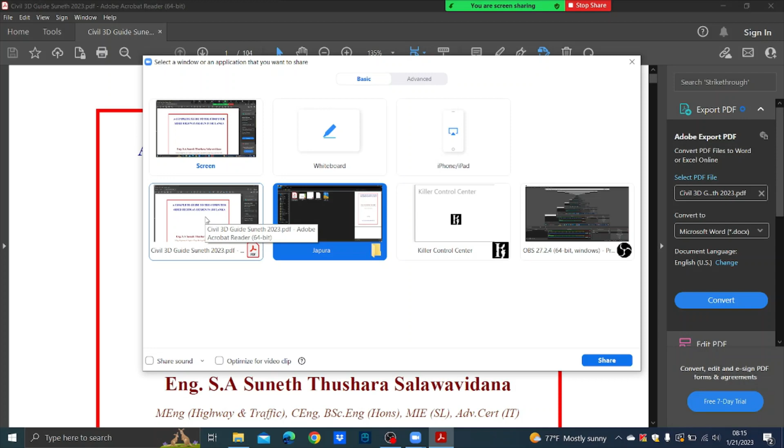Now of course this is the booklet I described, right? Here everything is there, from introduction to how to do the surface creation, that is 3D modeling.

Theory parts are also there, and how you are going to do the horizontal alignment, how you design compound curves, reverse curves, transition curves, and how to enter super elevation.

And vertical alignment. Now please understand, when it comes to vertical alignment, there is something called the offset method. At the very beginning, the data set we are having is using total station. So the problem with the total station is their levels are not that accurate.

But please understand, accuracy is different in highway engineering. When it comes to structural engineering, accuracy may be 1 or 2 millimeters. But when it comes to roads, we don't have that much accuracy. Maybe 5 millimeters or 10 millimeters is enough.

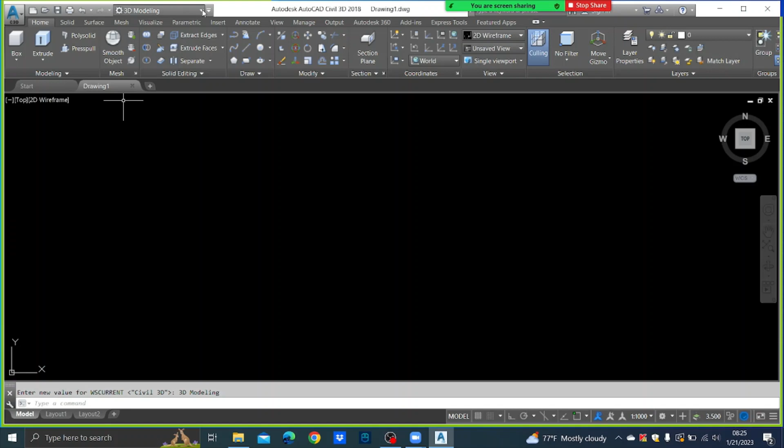If I drop down it, there are some other things as well. Now just think that if I go to 3D modeling, the working environment is going to change, right? If I am having Civil 3D, again it's going to change. And then right hand side of this workspace, you have another drop down box where you can either tick or untick this show menu bar. Now just think, if I untick show menu bar, what will happen?

I'll hide the menu bar. Here that file and things are not there. Now if I go and click show menu bar, here file, edit, view and everything is there. Now the command line should be there. Otherwise, as I remember, it is control F8 or something, the command will come. Now let's check control F8. No, control F7. No, F6. F6 gone. Anyway, don't worry, you can again start, right?

Right. Then the first thing that you have to do is you have to have your own template. What do you mean by a template? Now, please understand, usually any road agency or any highway design company has their own format. Some people call it chainage, some people call it station. Some people give the chainage as 0 plus 000. Some people give just 0, right? Different road agencies give different; it is kind of a presentation technique.

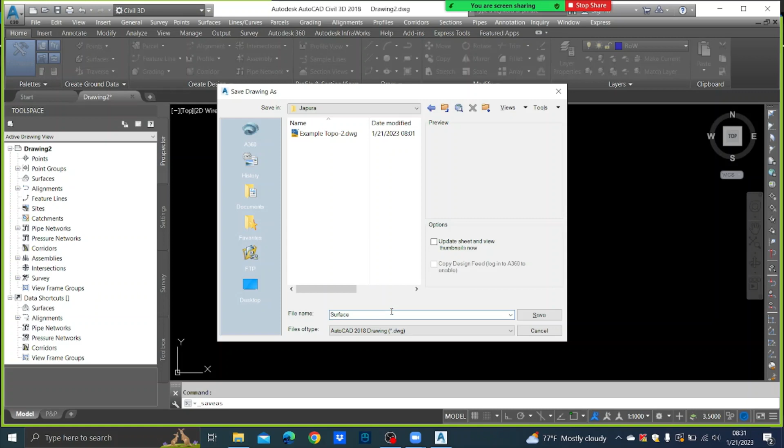Now please understand, I am not going to follow that book or that presentation. Everything is there. You can later read. But what I am trying to do is I am doing what is necessary, and that is there in my presentation and in the book. So actually I'm going to record this one and I'm going to upload. So if you have any problem, of course, you can later refer. So don't worry. If you have the software, please try to do what I am doing. Okay, that's all. If you are going to miss something, don't worry, we'll correct them, right?

So now your surface is being created. Surface in the surface file is created, right? So I will open my topographic survey file to see what is there. File, open. So here example topo 2, I'll open it. Now you know what is that, right? This is a topographic survey of a road. So what you can see there. Now there is a bridge here.

What is this yellow line? This is the towage line. That means the existing towage, right? What is this yellow line? That is the existing towage RHS side. Then what is this red color one? That is the existing center line.

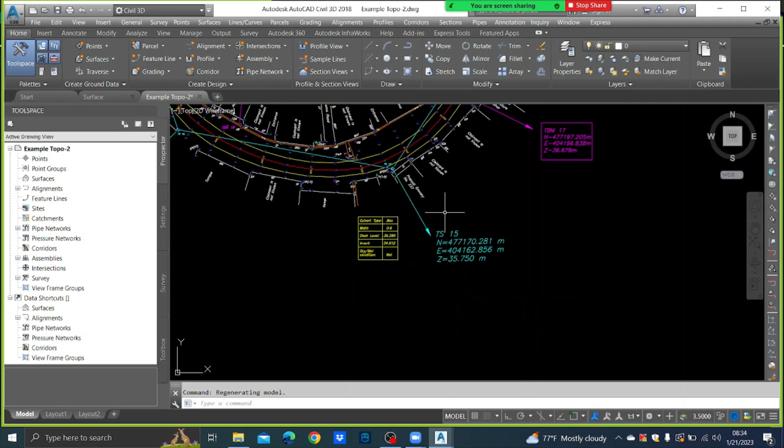So here there is this Samavata, and then Nilhani Motors, Nilhani stores. Like that, everything is given. So what are these things? These are the total station points that they have used, right? So they have run a topographic survey, and these are the points that they have taken. We want these points, so maybe these are some permanent stations or something. We want these points to set out our road once we complete the design. Okay. Now there is another thing they have given. I'll show you.

Here I open that notepad file. Right here, these are just data. These are just data. Okay. Now can you see here that survey has given us the data format PNEZCD data. What do you mean by P? P is point number. So please note down, right?

P is point number, N is northing, so that is the northing coordinate. E is easting, so this is the easting coordinate, and PNE, this is northing, this is easting, Z is elevation, 49.272, and CD, I don't know what do you mean by C, but it should be D only, right? D is description, NB like that. So that's all what we have got. We have got the file, topographic survey file, and we have the data set. That's all we are having for the time being, right?

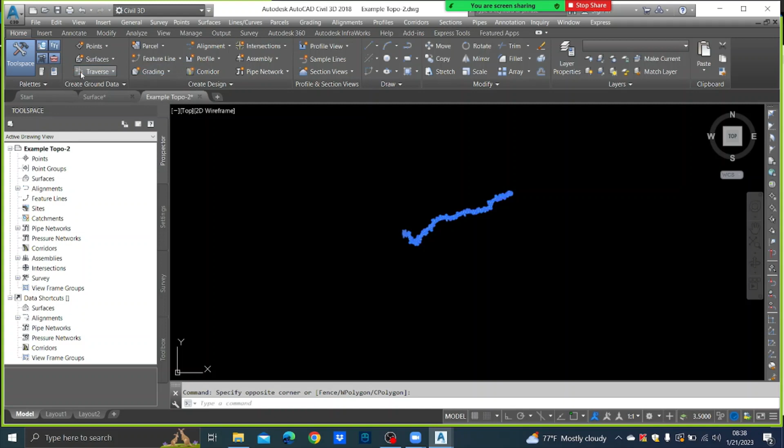Now there are two files. Can you see? One is surface, other one is example topo 2. Surface is the file that we created using our template. Example topo 2 is the one that survey gave us, right? So I'm going to copy this. When you select them, please understand you have to select both to select everything, right? Top to down, down to top. Edit. How you are going to copy? It should be just copy, right? So the cursor came back.

Then we will shift into surface, and here why is there? Because I have gone to a layout. So you go back to model, right? Then edit. Remember, don't just paste to original coordinates. There is a difference between your structural drawings and highway design drawings. If it is structural drawing, you don't have a coordinate. Okay, so you can paste it anywhere you want. But when it comes to the highway drawings, we always work with a coordinate system. Either it can be national coordinate system or global coordinate system or a local coordinate system or whatever, right?

So usually we go to paste original coordinates. So that means the drawing comes to the original coordinates which was done in survey's drawing. Okay. Paste to original coordinates. Now here this is that one. If you don't see it, okay, just think it's somewhere there. You can always try Z enter, E enter, that is zoom to extents, right? Now this is our survey drawing copied to our template, right? So you can save the drawing.

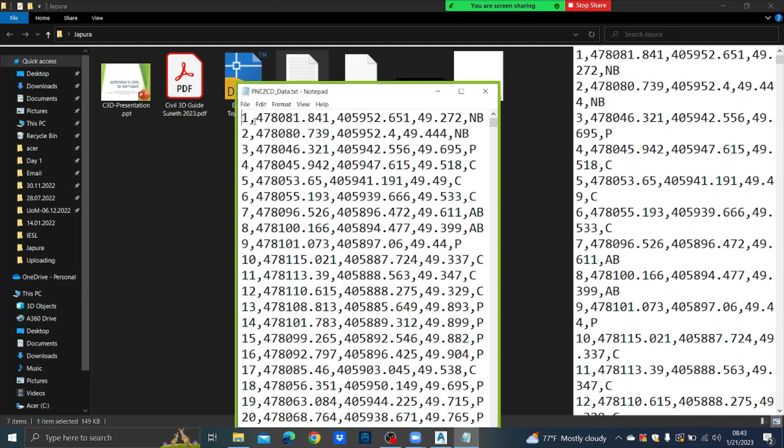Now do you remember here in our text file, it is separated by commas, not space. One comma, there is northern coordinates, comma, eastern coordinates, comma, and the elevation, comma, something like that. Okay, so that means it is comma delimited, not space delimited. If it was space delimited, there should be only a space, not a comma. So you have to select comma delimited format, right?

So here you have to select PNEZ comma delimited. PNEZ comma delimited, right? Here selected files. So it takes some time to show, isn't it? So you have to select here PNEZ comma delimited. And here from this plus mark you have to browse into your file. Now please pay your attention carefully for these things that I am telling. Now this is one such thing.

You have to make sure that your notepad file is closed once you do this. Why? Otherwise there will be a sharing violation. Why? You can't use the same file in two programs, one in notepad, other in Civil 3D. Okay, so what you have to do is you have to close the notepad if you have opened it to check something, right? Now the notepad file is closed, right?

So now we'll add and we'll go to our folder. There's nothing, right? Why? If you check files of type, it is CSV. That's a different type. Okay, so you can have dot text. Then it shows PNEZCD data text. Select it and open it.

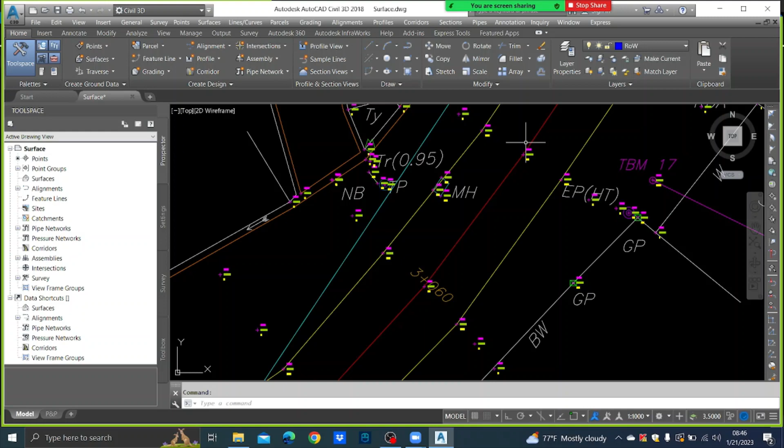Okay, can you see? And again, I invite you to observe some very crucial things in this file. What are they? One thing is, this is our existing center line. Now you can see the data has been taken exactly on the existing center line. Actually, what has happened is not that they have taken the data on the exact existing center line. What they have done is they have taken the points and then they have drawn the existing center line connecting each of them. It's same for tar edges, LHS and RHS.

Okay, now this is finished. We have imported all the points into our file, right? Now, before proceeding, do you have any questions?

Now, please understand that you are having a very big privilege to study this software, right? So, get the maximum use of it. We have only 4 hours. Please ask me questions if you have any. Right, no questions as usual. Right, so then we'll proceed.

Now I am going to create the surface. What do you mean by a surface? Surface means I am going to 3D model this road. Now you know this road is in 2D, because whatever you draw in Civil 3D or AutoCAD is in 2D, right? Okay, unless you have gone for some 3D design. So I mean the 3D modeling. Now we are going to 3D model. Up to that it is 2D, right? So what I'm going to do is I'm going to create the surface. So once I create the surface, I'll describe what do you mean by a surface, right?

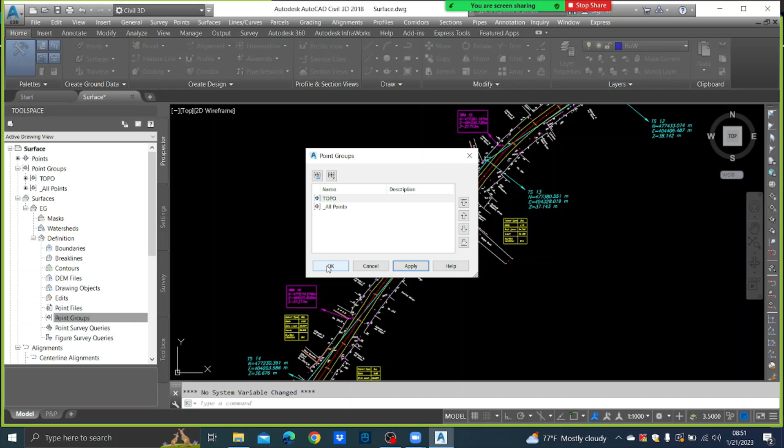Now you can close this. Here this is our surface. Now please pay attention on our surface. Now look what they have done, right? Look what they have done.

These are the points that we imported, and what they have done is they have drawn lines connecting each other. Now here our level is 36.892 and here the level is 36.819. Remember the levels, right?

Now if I check somewhere in between, you will see you are getting some elevation value at the very bottom, right? Elevation 36.825. So what this software is doing is that it interpolates the levels in between. So higher the number of levels that you have taken, higher the accuracy is going to be.

Understood? But usually we don't take levels everywhere. We are taking important points, right? Like edge, and then the center line. But remember now I'm going to tell you one important concept. I will save this first.

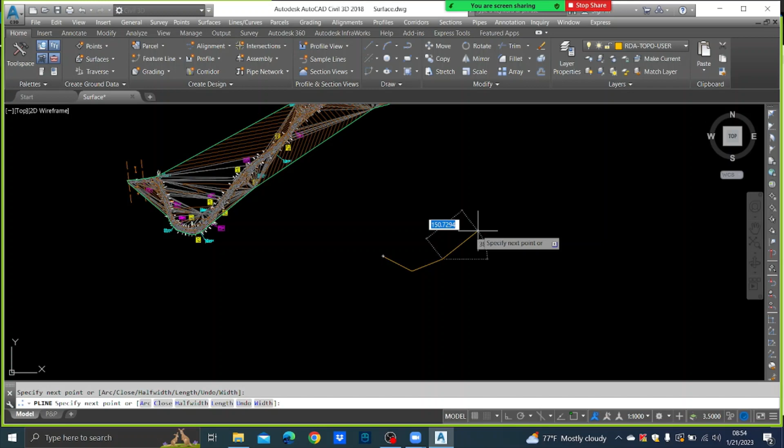Just think this is our road. And I am selecting some random layers. Why? Because I'm going to explain you something, right? This is the tie LHS, and this is the center line. This is the tie RHS. Okay, this is your road cross section.

This is LHS tie, center existing center line. This is what? This is tie RHS, right?

Now, you know, surveyor has taken these points in our cross section. Just think this one, and this one, and this one, and this one, and he has forgotten to take this center line. And he has taken, sorry, and he has forgotten to take this point also. He has taken this point, right? And he has taken this point also. Now I ask the Civil 3D to draw this cross section like this.

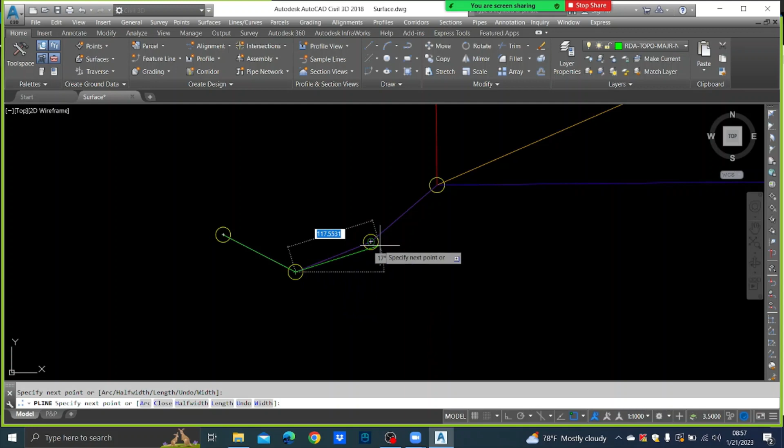Then it will try to draw it like this. I'm coming here, there's a point. I'm coming here, there's a point. I'm coming here, there's a point.

Then I am trying to go there, but there is an instruction. Definitely you have to connect this point. There I am coming here, and here what happens? There is no such instruction to take this point, so it will go like this. So now if you just think, this yellow color one is the actual cross section.

Blue color one is the cross section that the Civil 3D has now drawn, because we haven't given that other instruction so far, right? So this is the one that the Civil 3D has drawn so far. Now we are going to give an instruction.

Definitely you have to connect these 3 points. So once that instruction is given, this is the cross section it's going to draw. This is how it is going to model, right? Is this the most accurate one? No. Why? Because this is not connected.

But still, as far as our road is concerned, it is fairly okay. Now we are worried about our road mostly, not the widening sections. So this is exactly what I am going to do. I am going to give an instruction to the software saying definitely you have to connect this point, and this point. So for that, there is a tool in Civil 3D calling what? Break lines, right? So I'm going to delete this cross section drawing.

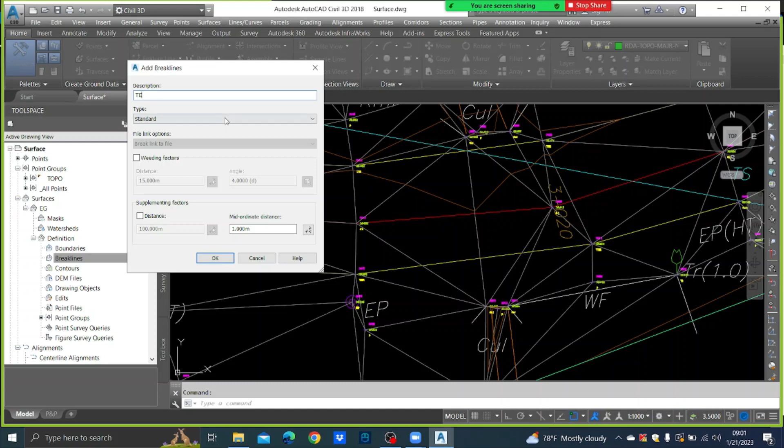You go to general tool space. If it is already there, don't do anything. So there is this expansion here, and you go to break lines, then right click, add, and give the description as TE, type should be standard, and then press OK, and then it says select objects.

So you select this edge and you select this edge. Now pay attention, once I press enter, these lines that cut edges will vanish. Press enter, right? Now it is no more.

Now I have to give another break line, that is the existing center line. Here you can see this is the existing center line, they have cut it. Now I am going to add this center line as a break line, and these two lines will be gone. Break line, right click, add, give the CL, type is standard, and press OK, and select objects, this red line, that is center line. Press enter. Can you see now it's gone?

Save the drawing. Right. Now there is an obvious error in this surface. What is that? Now I told you how the Civil 3D models the terrain, by drawing lines connecting each of the points. But now just think here, there is one line starting from here and it is coming there. He has taken some there. Now everywhere in between, the software is trying to interpolate the levels. Is that correct? That's wrong, obviously.

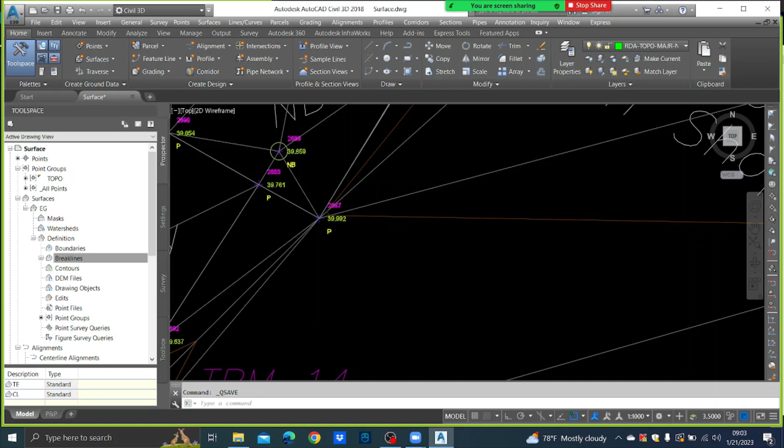Now if you just think here, there's one point here at this part of the road, and there's another point there at the other part of the road, and they have connected these two, and they are interpolating in between, because we know nothing about this area. We haven't taken level, so this is obviously wrong. Now here also see one point here, another point there, and they are interpolating. So we have to show our limits. This is all you have to go, right?

So what we usually do is we add a boundary for that. So before drawing the boundary, make sure that your O snap is off, F3, right? Then this is a polyline. So you draw a polyline. It's like this. So select your boundary. This should be our boundary.

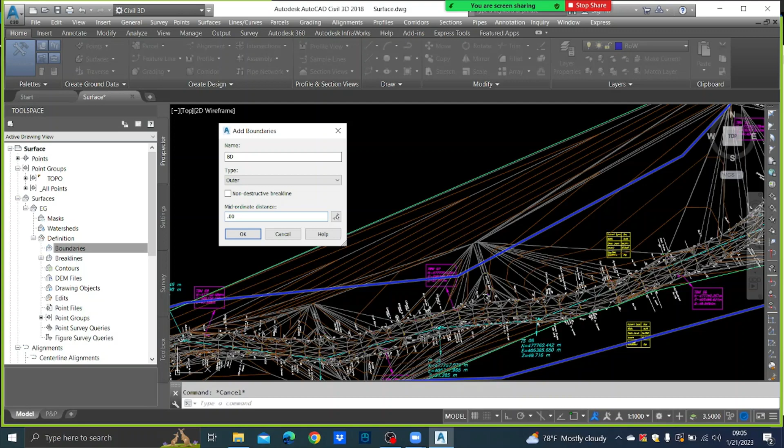There is something called boundaries. You select it, right click it, add, and press and type BD. Type is outer, untick non-destructive break lines, and mid ordinate distance you have to give as 0.001. These are some conventions. Press OK, and then they say select objects.

Once you select this object, you will see the lines beyond that one will be gone. I'll select this one and press right, already gone. Now this is our surface. This surface is perfect, at least up to the accuracy given by the Civil 3D software. Right, save the drawing.

There is another thing that we are going to do. We are going to export this into XML format. XML is a text format. This is kind of a Civil 3D format, and we are going to export this into a text format.

The advantage is, you created this surface in Sri Lanka, maybe you can export and email that into America or Australia without any problem, because you are going to reduce the capacity of the file. So have you studied some IT?

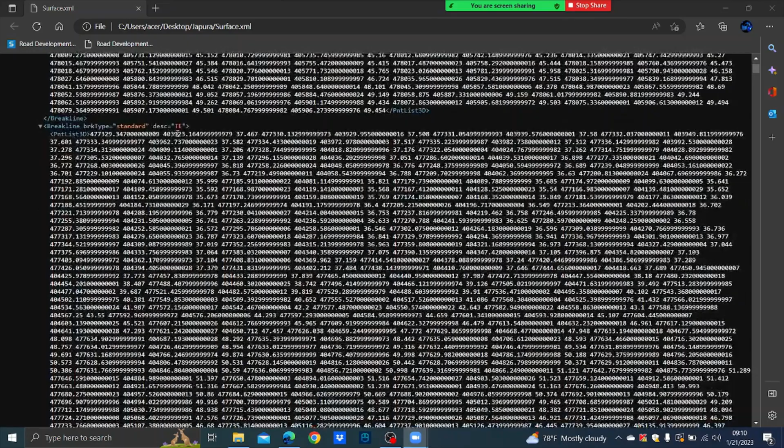Now you can see they have defined the boundary. These are the coordinates, and they have defined the break lines. There should be three or two because we created two - this is TE, yeah, there's another one TE, and this is CL. So they have defined the break lines also, and after that these are points - they have defined the points also. So everything is there. Now you can see the sheer number of points. Everything is there, only thing is that you can interpret it.

Now again open Civil 3D software. Right, I have opened Civil 3D software. Now I am going to load my template. Do I have to copy and paste it again? No, because the template is already there.

Here file, new, and here a folder is there. This is our file, you open it, press close, continue with the current command, and then you can save it as - go to your folder and you can save it as, say, alignment. Now this drawing one is the one with the default template, you can switch off it.

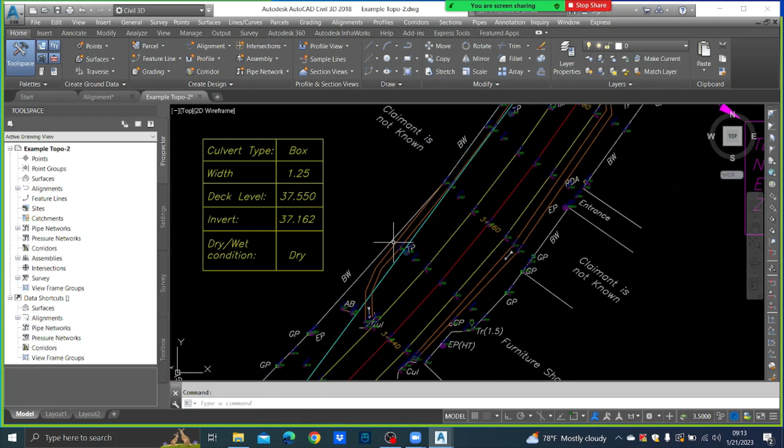Now you know again you have to do these corrections, what you did. You have to switch off these things or freeze, number also, and then height also, and this point we'll see point. Right, now select everything.

Edit, copy, copied, go to alignment, edit, paste to original coordinates. Here, now you close that example topo 2 and save this alignment. Now even though you call it alignment, nothing we have done. We have only copied the surface drawing from the surface drawing, right?

Now we can import our surface that we created. How we are going to do that? File, import, import land XML. Now you go and select surface and press open. Here also press OK. Now you can see your surface is imported.

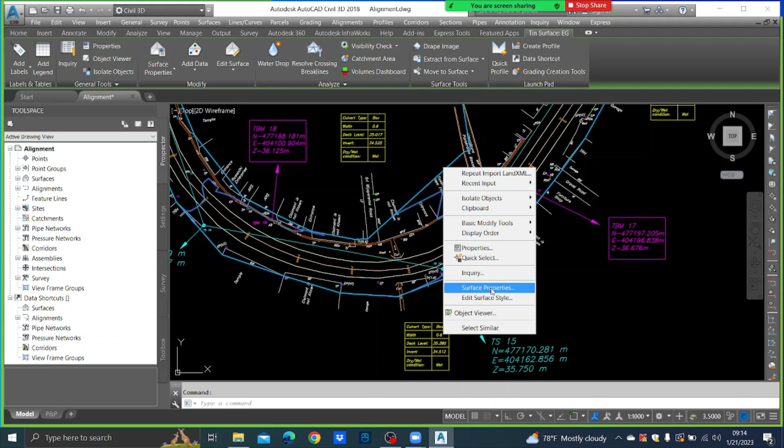If you have any doubt whether this is the same surface, what you can do is you select this surface, go to surface properties, and here surface style should be, you remember, contour points and triangles and borders. Press apply and press OK. Now this is the same surface that we created. Save the drawing.

Now you know when we are going to do the alignment, of course we don't want to see these details. So what we are going to do is we are going to switch off the surface. Now you will ask me why, if you are going to switch off it, why did you create it at the first place? That I will explain you in the middle, right? Why we created this, right?

Now you select this one, right click. Don't delete, right? If you delete, it's gone. Okay, so what you are going to do is you go to surface properties and then surface style we are going to put it to no display, right? Then still there are some three lines. We'll see what are they. This line is EG break lines. So you can switch off it, right?

Now this is our road and we are going to put the alignment, right? Now before trying to design the alignment, before trying to design the alignment, you have to do something. What is that? You should know the theory behind it, right? What is that theory? Give me a second, I'll show you.

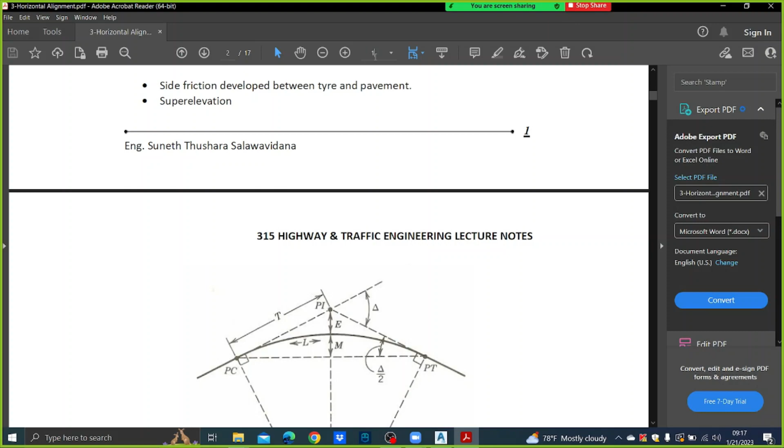I'm going to show you some notes, right? That you already have. This one you have like presentation, of course. So I'm going to show you a table. That table you have, right? Here, this is the table I want.

You know, so what is your design speed? You have to know that, right? Your design speed is 50, let's say. Then you know your minimum curve, your super elevation maximum. Just think that this is in flat terrain, so the maximum super elevation you can give is 4%, right? So your curve radius should be 95. So it's better if you can go above 105. So that you have to keep in mind. Your minimum radius is 95, and it is better if you can go beyond 105.

Also, if you cannot design for 50, maybe you can go for 40. So your minimum curve radius should be 55, right? So you have to put all your effort to improve that into at least a 55-meter radius. 95 is better. We'll see. Okay.

Right, now please pay attention. I am going to design, right? I am going to design. Please pay attention. Now usually, you know this is an existing road, right? So we are going to improve that. So for that, what we really do is we have to follow the existing centerline as much as possible. Now you know there is a bridge, of course you can't do anything with that.

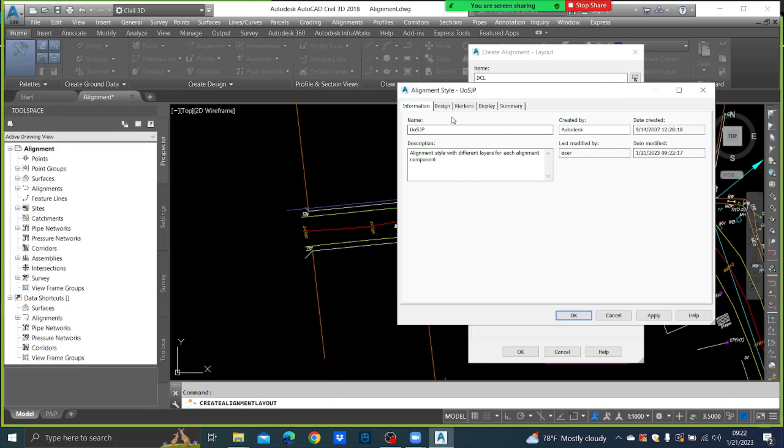Here these are, of course, just some templates. So if you want, you can change them, right? Say edit current selection. So if you want to change that name, you can change. It comes there, right? If you want to change these things, you can change here display. If you want to change a color or something, you can do it quickly. Okay, it doesn't matter, right? So you press OK,

and then there comes alignment layout tools. Okay, and then here we are going to design. Here you can see it should be a line, right? We are going to start our alignment either with a fixed line or a fixed curve depending on the road geometry. So here it should be a line, so we will select fixed line, 2 points.

Okay, so I'll select here, and I'll go this way. So you have to make it as close as possible to the existing center line, right? I entered, and now I press enter. Now you can see here it is being designed up to here. This green color one is the major stations, 0, 20, 40, right? And this blue color one is the minor stations, right?

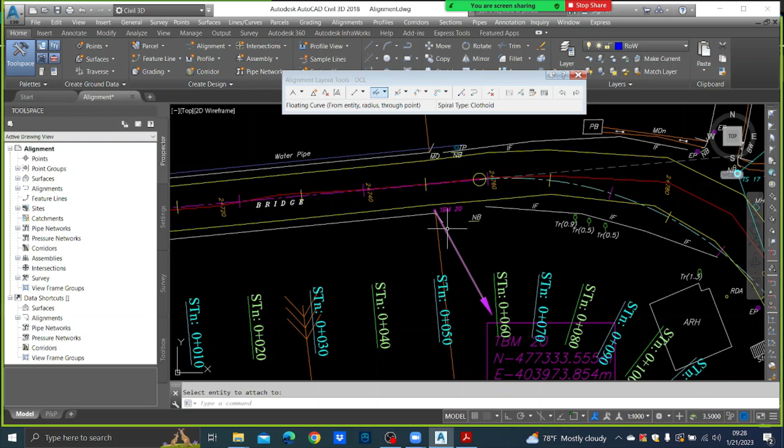But it improves the road. If your bridge is going to finish from here, then only you can have a curve like this. Okay, so your curve should not come into the bridge. These are the things that you have to check, right? Because you can design it and give, but they cannot construct it because the bridge is finished here. So only after that you can start your curve.

Now it's okay. Now just think, there it seems like a straight. So for that you are selecting floating line. Select entity to attach to this one. So I'm coming like this. You have to match it as much as possible to the existing center line, right? Now maybe if you want to change it a bit, you can change it like this, right?

And then what about this curve? There are two curves. Can you see? One curve is like this, the other curve is like this. There are two curves. It is not just one curve. If you want, you can check it. How? So you go to this home and here these are arcs. So you can get the start, end and direction.

This is not Civil 3D, yeah? This is AutoCAD. You select the start point, say this is the end point, try to fix a curve like this. It already fixed. You have to get this start and direction. You select one here, one point here, the other point somewhere here, and try to fix. You can't fix. Can you see? If I fixed it like this, this going to here, it is going to go out the existing center line.

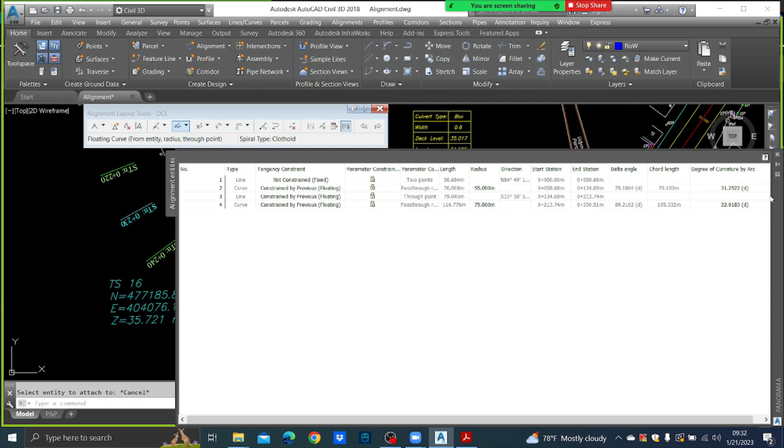If I put it like this, now you can see 75 is okay, but I am narrowing the curve. Can you see? If I go to this side only, I am improving the curve. Here I am narrowing. Okay, so one tactic that you can do is you can select this alignment, sorry, not that one, this one, sub entity editor, and then you can pick this sub entity and it shows your parameter. So you can increase the radius.

I'll go for 80 here, or maybe 85. 85 is too much, so I'll go for 80. Still this is a bit narrowing. So what about 82? 82 will be okay, but the problem is we usually don't go for this kind of odd numbers. It's better if we can go for 80 or 85, right? But if you can't help, then of course you can't do anything. Now I can't teach you anything about how to design. That you have to decide yourself.

Now maybe this is not going to work. We don't know, right? That depends on, you have to go to the field and check. Now before proceeding, I'll ask you a question. Usually you don't answer, so I'll answer it myself. But my question is, why did we create the surface here? Now, do you know anything about whether it is a precipice or a mountain or whatever?

No, you don't know. So one thing you can do is you can draw a line near perpendicular, need not be exact, to the center line, and then you can draw a profile and check what is the cross section here. You select this, right click, pick profile, and here change that into 1000, press OK and paste it here.

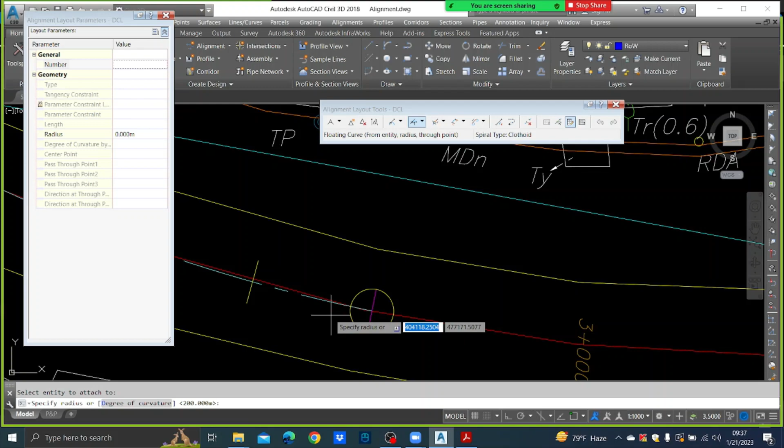Specify radius. So I'll go for, say, 150, lesser than 180. Then it asks, is the curve compound or reverse to the curve before? It should be compound. Why? The same direction. So I'll select compound. What is this red color one? That means you can't place it there because there's no such solution.

So my assumption is wrong. You can't go for 150. If I'm going to go for 150, I'll have to go like this. Escape. So maybe I'll try, say, 100. 100, this is less than 180 compound. Even 100 is not going to work. So what are we supposed to do? Maybe this may be a lesser curve. We'll check.

So our minimum one is 55, remember? So we'll go for a 60 curve, lesser than 180, compound. 60 is okay. Can you see? So my earlier assumption was wrong. It is a compound curve. This one is 80 and this one is 60. And now, you can't say perfectly, but it almost matches with the existing topography.

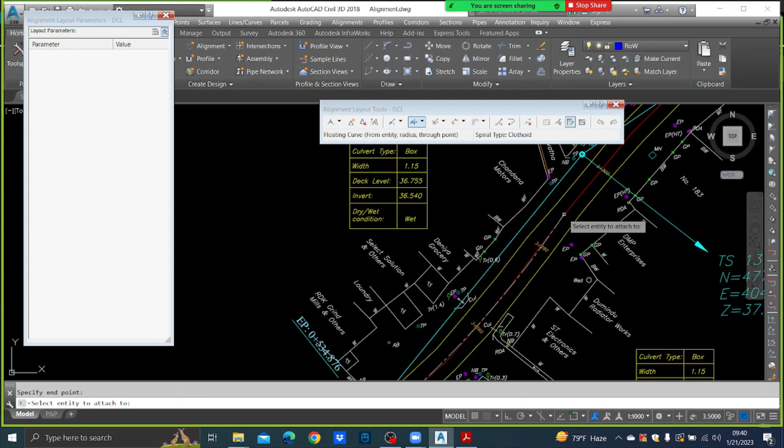Select entity to attach to. Then we'll select this one. Specify radius. I'll again go for 200, lesser than 180. Now here this is reverse. Okay, there is another curve. So that means it's again reverse, the other side. Again we'll take 200. Radius 200, lesser than 180, it is reverse. Seems it works.

Okay, now from time to time, save the drawing, because Civil 3D has a very good history of crashing. If it crashes, everything is gone.

Now there is a line, floating line. So I'll place it here, enter, and there is another curve. How much do you think? 200? We'll see. 200, less than 180. It is greater than 200. So you can improve it.

How much would it be? 300? No. Then we'll go for 250. 250 is okay. Then we have another curve. You have to assume. We'll say 200, reverse.

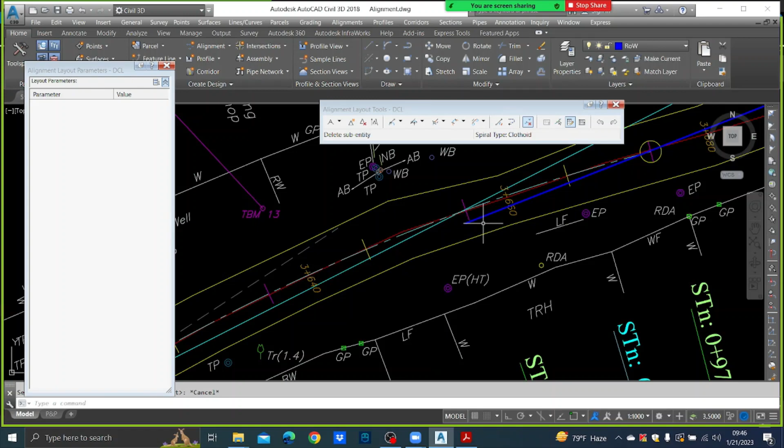Now these are the actual practices we do, right? Okay. Now this is the maximum you can go up to, right? Just think that is the maximum you can go. This line. Beyond that you can't go. So you get something like say 8 meters to the other side. Now this is the line that you have to follow, right? So what you can do is, your alignment is like this. You can go here and then you can have a line like this, right? Will it work?

We'll see. Now I am going this way, and now I'll go for 7.6. Now it seems okay. What about here? But they are going to be acquired. What if we are going to follow the existing center line? 7.6. These things you have to take decisions on, right? That cannot be offset because it's a polyline. Anyway, you can.

What is this one? My dimension toolbar was not there. That is why I put it here. So just check. No, we'll draw a line. Now this is the maximum place that you get towards their side, right? That's the maximum place that you get towards their side. Now offset 7.6. What happens? Now still their buildings are going to be acquired.

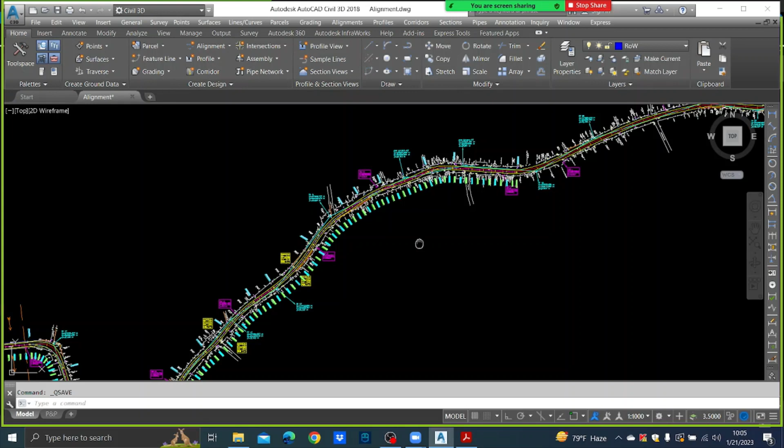Now this is our alignment. Next we are going to create our profile. So it's like a crash course. Quickly we finish align, create the surface, and then we create the alignment, and then we go to the profile. Before that, if you want, you can create your other alignments as well. So what are these? Now this is how you do that.

You have to have your lane edge, that is 3.5. So you can offset your alignment by 3.5. Here it's 3.5, the other side 3.5. So you can make them alignment also. It's not a big thing, you can quickly do that like this.

Alignments, create alignment from polyline. Earlier we selected create alignment by layout, right? Now we select create alignment from polyline. So they say select the first line, the polyline. We select here and press enter. Press enter to accept alignment direction. Now the direction, can you see? This is the direction, right? Otherwise you can reverse. Now this is okay, why? Because I selected it from the beginning, right? So I press enter.

Now I have to give a name. Usually I give DLHS, that is design lane LHS. The type should be offset and site is I design. Alignment style is this one and label style is UM. You have to remove these things, add curves, and keep erase existing entities, because then this line is erased and only the alignment is there. So press OK.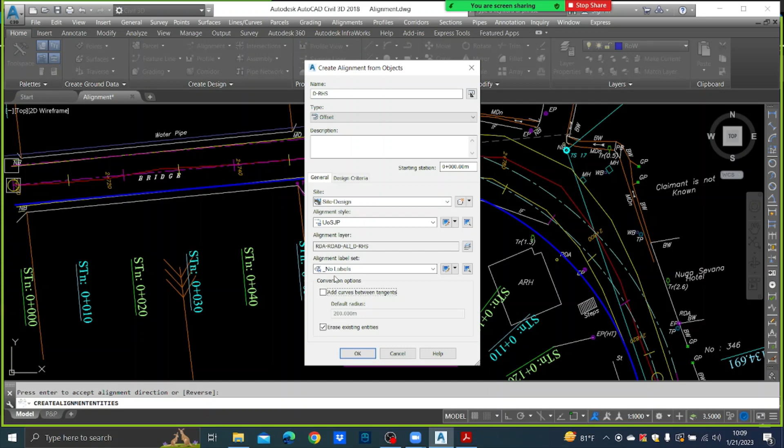And then we'll go to what? We'll go to hard shoulder, that is 1.5 offset. Object 1.5 offset, this side and this side. So I can make them also alignments.

Alignments, create alignment from polyline. Select this one, enter. No, I don't want to reverse, enter. You give the name like H hard shoulder LHS. Type is offset, site is site design, alignment style is this, but don't give alignment label set, so no labels is okay. Uncheck add curves between tangents, so erase existing entities should be there. Press OK.

Then we'll go to this one. Alignments, create alignment from polyline, and select this one, press enter. So this one H RHS, type is offset, site is site design, no label, same thing, right? Uncheck add curves between tangents, but check the erase existing. What I mean by check is ticking this.

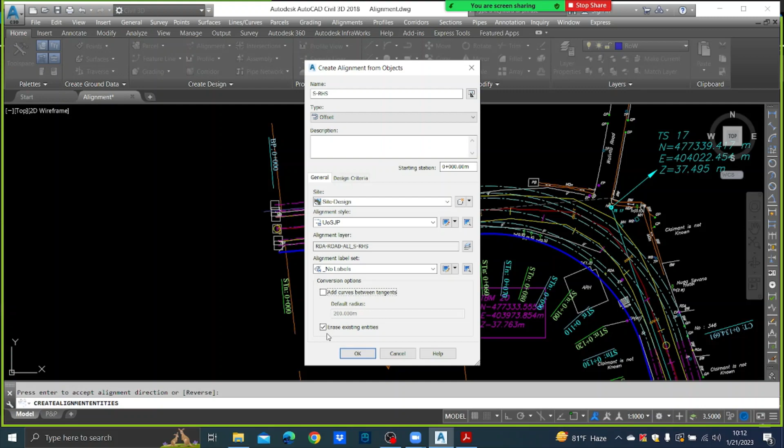And again you go to alignments, create alignment from polyline, select this line, press enter, and this one S RHS. Type is offset, site is site design, alignment style is this one, same, alignment label set no labels, uncheck add curves between tangents and check erase existing entities, then press OK. Now all the other alignments are created.

Save the drawing. And now if you want to have labels, that means the curve radius and things, of course you can put them here using Civil 3D. How? You can go to alignments, add tables, and renumber tags. This is in the book.

Okay, this is in the book, renumber tags. So you press S to give settings, line starting number, you can change, everything should be 1, right? Then only it starts from 1. Press apply and press OK, and then you go to alignments, add alignment labels and multiple segments, and then select

your center line alignment. Now you can see here, this is L1, length is given, this is C1, radius of the curve is given, and the length is also given. Here C2, curve 2, radius is given, length is given. C3, radius is given, length is given. Now I'm going to save this.

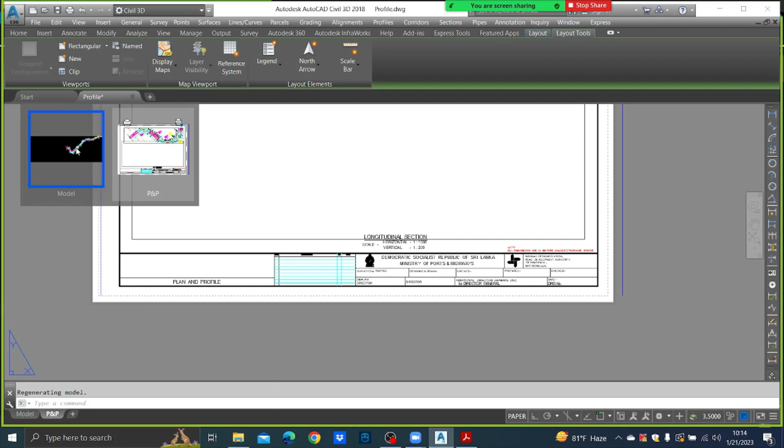Save as, you give the name as profile. Okay, save. Now here the name changes to profile. If I put it like this, so maybe it will come like this. Okay, so don't worry, you go back to this one, or else you go to model.

So I'm going to create the profile. How I'm going to create the profile is profiles, create profile from surface, profiles, create profile from surface.

Here there are all alignments. There is one problem. What is that? Here, what is the name? SRH, that's wrong, right? It should be SLHS.

And then here, alignment properties, it should be SRHS, not 1. Right.

Now we'll go to profiles, create profile from surface. Here DCL, these all the alignments are there. We are going to create the profile for our design center line.

So that is DCL, right? And now this is the EG, select surface. EG means the surface that we created. You are going to add it into the profile set. Add. And then you go to draw in profile view.

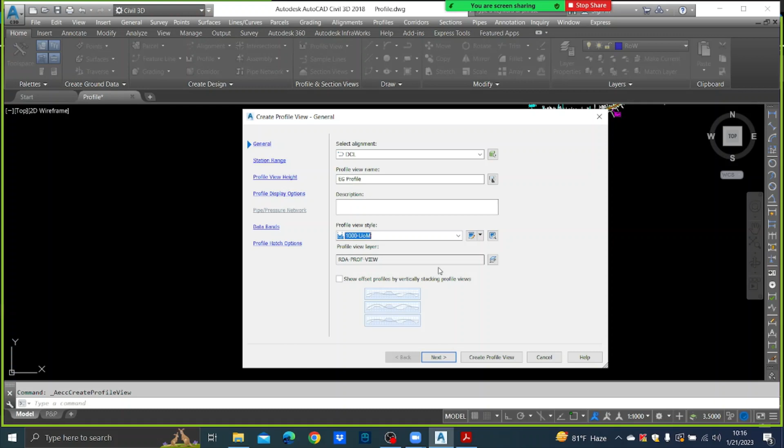Next. Then station range, you don't want to change. If you want, just think that you are having something like a 30-kilometer road. Then of course you can't create everything in one file. So you can change it using user specified range.

Here, since it's just 1 kilometer, no harm. Then profile view height, they have suggested a height. If you want, you can change it by giving user specified. Then you go to next. Profile display options, we are not going to change anything. Data bands, we are going to have our customized one, 1000. Here we are not going to change anything, later we will change.

Okay, here can you say station? FRL means finished road level, EGL means existing ground level, VGO means vertical geometry, HGO means horizontal geometry, and SE means super elevation.

Okay, but we are not going to change anything. Now this is as it is we are getting. Later we are going to change them, right? So we go to next, profile hatch options. No, you don't want to change anything. Later we'll change if necessary.

Create profile view. So they say select profile view origin. You give a convenient place. Put it something like this. Now this is your existing profile. Can you see this is your existing profile? The road as it is existing.

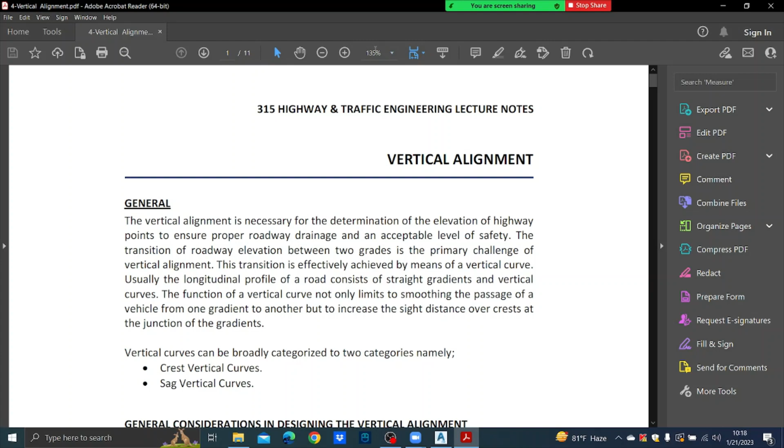Now what we are going to do is we are going to design the existing profile. Before that, of course, you have to read your vertical alignment notes. I have given you as a presentation, or else I have a note with me here.

I'll show you. The minimum one that we have to give is, we have to ensure that stopping sight distance is... Can you see this? So you have to make sure that stopping sight distance is ensured here. So if it is 50, you have to give for this is for a crest curve, right? Minimum k value should be 9.8.

Okay, and if it is a sag curve, k value should be 12. So remember, minimum k value of 9.8 should be there for a crest curve, and for all your sag curves it should be 12 k value.

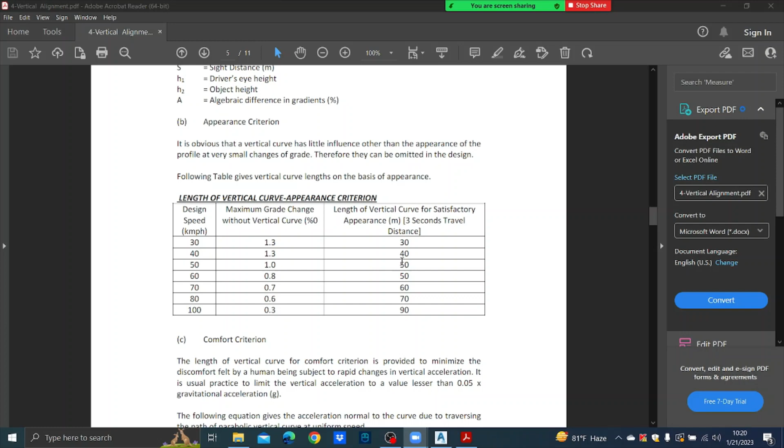So what will be the curve length? That you have to refer the table. Okay, somewhere it was there. Now 50, so that means the curve length of vertical curve should be 50. So please keep that in mind when you are going to design it.

Now I am going to design the vertical line. Before that, you can see the levels are given in 20-meter interval. Now can you see the finished road level is...

Now only you can see your application. This is the existing profile. I am going to design the finished profile. Now you can see, if you look at the finished road level and existing ground level, both are the same. Why? Because we haven't designed a finished road level yet.

And vertical geometry is a mess. Why? Because it is the existing one that we are having, and super elevation is not given. So we'll have to do all these things. So we'll do that, right?

So if you want, you can have this into 10-meter intervals. How? You can select this profile view and then go to profile, edit profile view style, and here you can see major tick details is 20, so you can make it to 10. You should be under this horizontal axis tab. Press apply, press OK. Now in 10-meter intervals you are getting this, right?

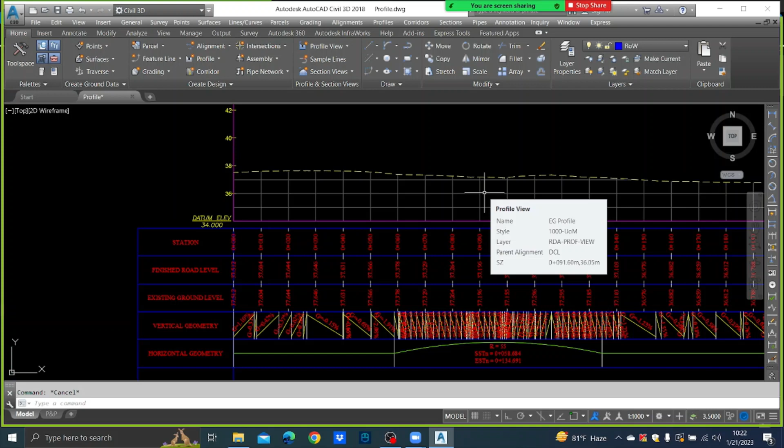Now let's start designing the vertical geometry. Before that, you have to keep in mind three parameters. For a crest curve, the k value should be 9.8 minimum. For a sag curve, the k value should be 12 minimum, and the length of the vertical curve should be 50 meters. With that, we'll try to design.

Now in designing, what we do is, first we'll try to match our design profile as much as possible to the existing profile. After that, we have our pavement design. We'll have to assume, because it's not given, if a real project is given.

Now we'll say it is a wearing course, please note down. Wearing course 40 millimeter, and binder course 60 millimeter, and ABC 150. So everything comes to 250.

So we'll go into that pavement design. If it is a real project, of course, the pavement design should be available with you by now, right? So we'll go to design profiles, create profile. Earlier we selected create profile from surface. Now we are going to select create profile by layout.

Now it says select profile view to create profile. I'll select this one, and you have to give a name. I'll name it as FG profile. Better FR. Why? Finish road. Okay, FR profile.

And for profile style, you have our customized label set, label and profile style. Profile label set also you have this customized one. Now press OK.

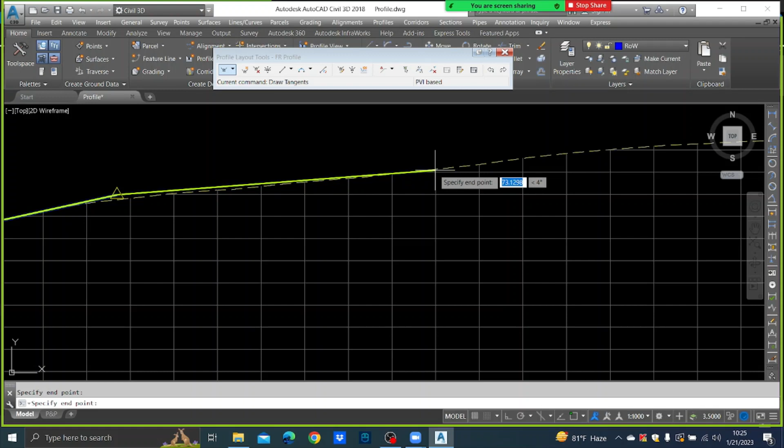Now don't worry, you can later change these points. So we can go this way. Now just you can go on drawing like this, later you can change, right?

Now once you press enter or escape, you get here, IP station is coming, IP elevation is coming. These are IPs, that is intersection points, right?

Then we'll try to insert the curves. Before that, there's another thing that you have to check. What is that? The gradient.

Gradient should be greater than 0.3, right? Now we'll see here 0.16. You can't have that. So you have to make it to 0.3 minimum. Here 0.1, you can't allow. Why? Drainage problem, right? 0.3, not 3%. Please, now here it's almost flat. You can't. Okay, so you will have to change these things.

Now we'll start from this, from the beginning, right? Now you can't have your design profile like this. Why? You can't cut the surface, right? So you have to think all these things before you start design.

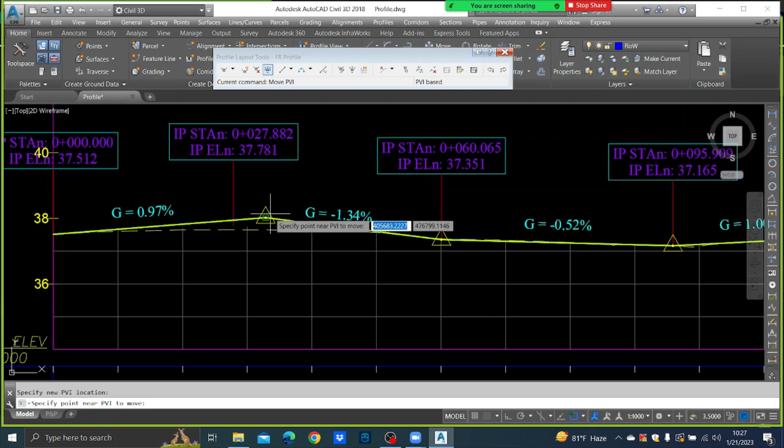So using this move PVI tool, you can move them like this, can you see? Better you have osnap switched off, and you have to have say minimum 25. So maybe it's like this, we'll see, right?

So one thing you can do is take this into, just like the alignment, into 25. Now check, this gradient is okay, this gradient is okay, here is 25.

Now we don't put in some odd values, because these are good practices. And if it is 25, can you have somewhere here 60? No. What is the minimum value you can have? 75. Why? If it is 25, half of this curve comes here, because our curve length is 50, half of it is 25, so 25 plus 25 is 50. And if we are going to have another curve, because if it has an intersection, VPI, you have to have another curve, so there comes another 25 there. So it is 25, half the curve 25, that is 50, and half the curve 25, 75. So you cannot have 60 here.

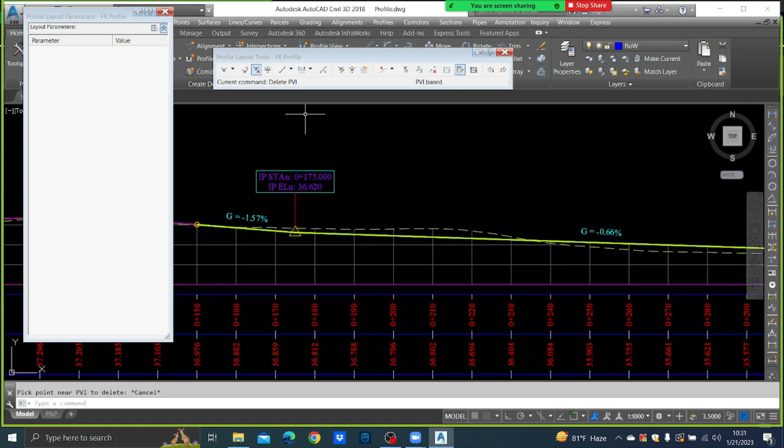Okay, so we'll try to have a curve here, 50, it seems okay. And if it is 125, you can have only 175. Okay, so you can't have an IP here. So we'll remove this IP also, and we'll try to have one at 175. Oh, what happened? Right.

So we'll have 50 here, and then if it is 225, the next one, you have to have 225 properly. Then your next one should be 275. So it should be 275, right?

And then let's have a, now I am checking these things, 0.56, 2.62, okay, 50, and then you can't have this one, zero gradient. Okay, so what you can have is, there should be another 50. 275, that is 325. That is the minimum place, but we don't want to go for the minimum one, say we'll go for like this.

So you have to make sure this is minus 3. Minus 0.3, minus 0.3, so that is the maximum you can go. So we'll have a curve here, 50, and after that you see it is 340. So the minimum one you can have is 390, but that's the minimum one. But you can match this with the existing ground like this.

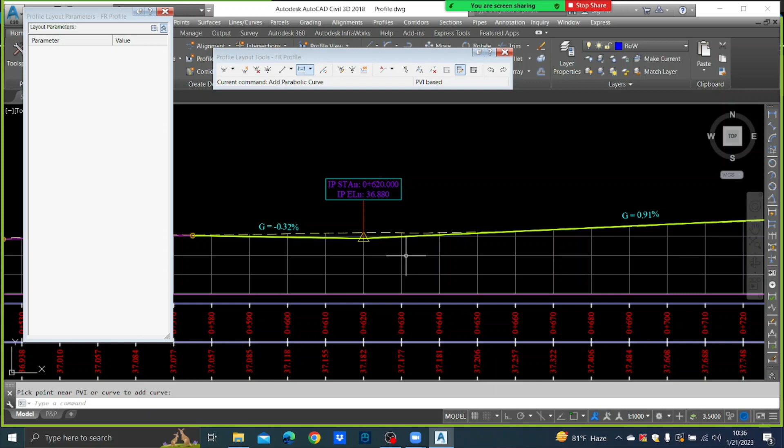What about going this way? If I go this way, the cut is going to be high. If I go this way, the cut is going to be less, but I can come only up to here. Why? Otherwise I can't have a curve. So we'll try. So I'll go to here, 620, and maybe I'll make this into minus 0.3. Now it seems okay, and here you can have a 70-meter curve. 70. So that is all you can go, right?

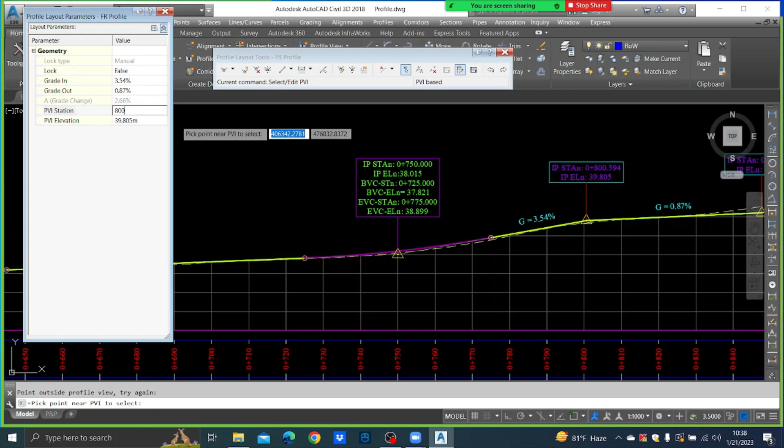Oh. Then this should be, oh, better. I think we can go to 750. Okay, 750. Later we can change, right? 50, and here let's go for 800. Oh, sorry, 800. And then again we can go for another 50. Here we have to go at least, yeah, at least 25 meters. That is 850. And then you can go for 50 here, right?

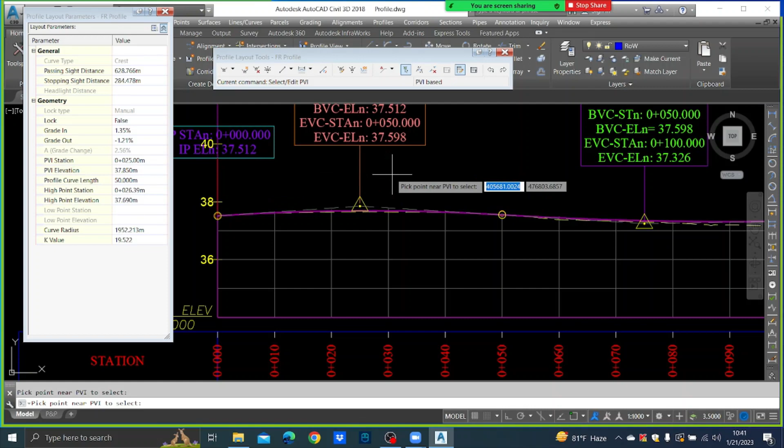How? Select this, say it is 311, sorry, 38.11. So maybe you can go for 37.950. Still you can reduce it or lower it, 37.9. Still some more, but in such cases you will have to check the gradient. Now you have to change this label set to reflect your changes.

How? You select this one, you go to profile view properties, and here you know FRL, that is finish road level. Here you have to give profile 1 as FR profile, profile 2 as FR profile. Okay, and then you have EGL, that is the same thing, right? That is the EG surface. And VGO, vertical geometry, that is FR profile. Others you can't change, right? So you press apply and press OK. Now you can see here,

now this is a crest curve, vertical curve length is 50, K is 20. What about the gradient? Unfortunately it is 0, so you can't make that change. So you can check here, see, no, what has happened is here, because there's no gradient like that, but of course you have to check like that, right? Grade in is 1.35, grade out is 1.2, that's okay. K is okay. Now this is perfectly okay. This sag curve, K is 33, our minimum is 12, okay.

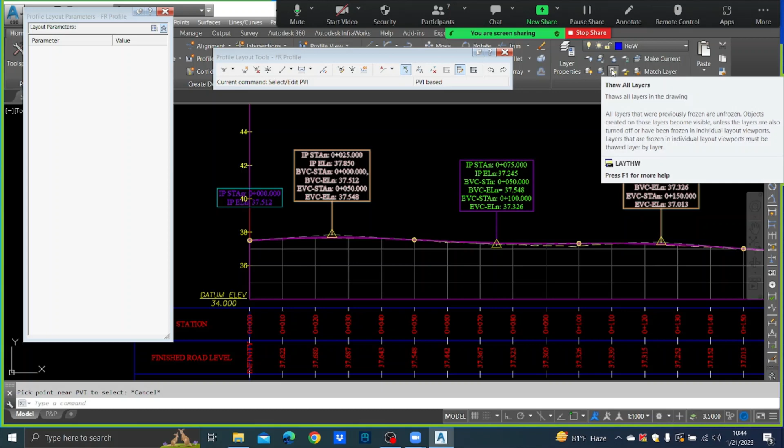The road is not that way, that is why you are going to have features like this to match it to the 50 kmph design speed. Finally, what you are supposed to do is raise this according to your pavement design. You know it is 40 millimeter wearing course, 60 millimeter binder course, and 150 millimeter ABC. So altogether it comes to 250, right? Did I sum them up correctly? Yeah, 250, right?

So using this one, raise/lower PVIs, elevation range, PVI range, all. So elevation range is 0.25. All. You press OK. Now can you see everything is raised at once? But you have to do one thing. What is that? This is where your project starts. Now, can you have a step like this? No, you have to take it into the existing one.

But anyway, let's check whether I have that one, then I can show how we can do it. But of course you should know how to manually enter. We'll see whether I have it. No, we'll go for the manual one because otherwise you cannot study, isn't it?

So come to this general toolspace, and in the prospector, under sites, site design, alignments, centerline alignment, there is DCL. So I am going to insert superelevation there. Right click and go to edit superelevation. Never go for calculate superelevation, because that option does not give our Sri Lankan standards. So you have to open the superelevation curve manager, and then go to this tabular editor.

In the first curve, curve 1, you can right click and add station. You have to give your starting station. So it is 0. If you expand this you will see transition in region, there's a manual station. You can right click and assign critical station. You can give whatever you want because it has no influence on the superelevation, that is just the starting point.

So we'll give begin normal crown, and these: left outside shoulder, left outside lane, left inside shoulder, right inside lane, right inside shoulder, and all these should be minus 2.5. So you can just enter minus 2.5. If it is not coming like this, there is a bug. So you close it, go to the tabular editor again and try it, then it will work. You can copy and paste it everywhere. You have to enter the same value 8 times.

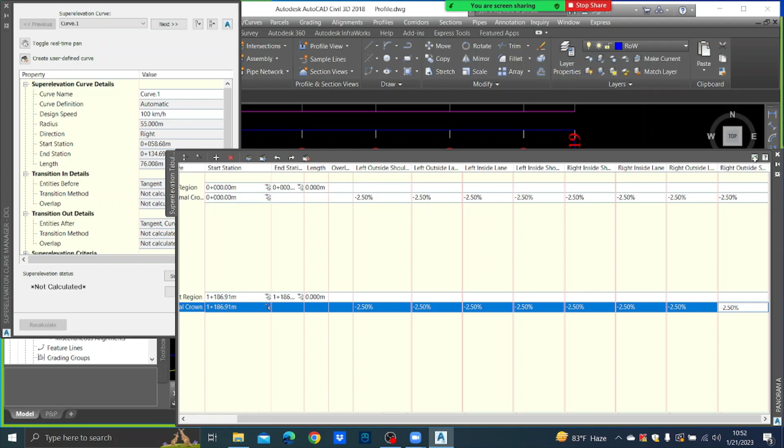1186.91. Here transition out region manual station, you change this to assign critical station end normal crown, and here also you have to have the same. If it's not working, then again you will have to close it and go to tabular editor, and then you can paste it. This is some tiresome work, that is why we have developed some macro enabled Excel sheet. Okay, but if I give you now, you will not understand how to do it manually.

Okay, so I will show you how to enter super elevation for one curve, because we don't have time, right? For this curve, it is 55. Now you know, if it is 55, what will be our super elevation? It should be 4, right? If I remember correct, it should be 4. Yeah, it's 4. So I'm not going to enter super elevation there. Or else we'll go for the first one, but it should be 4%, right?

So we'll have to calculate the superelevation development length, but I'll take it as 36, right? DCL edit superelevation for the first curve. Tabular editor, this is the first curve, add station. Now you know it is 59, we round off 59. If it is 36, 24 out, 12 inside. 59 minus 24, that is 35, right? So we'll go for 35.

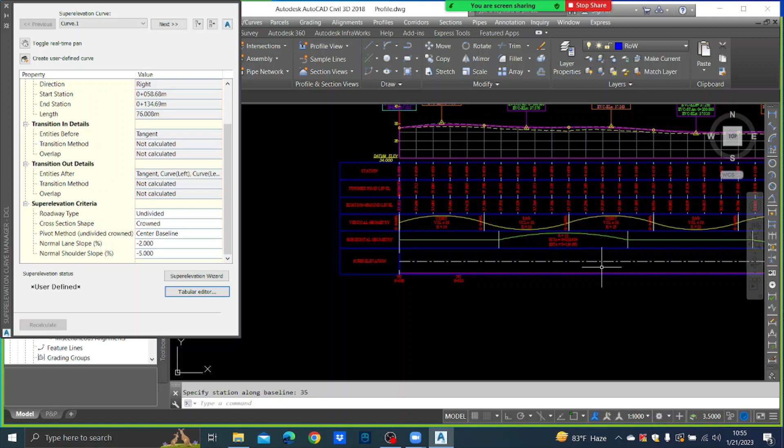Here manual station, that is end normal crown, because normal crown is going to end there, right? So it has automatically come. Why? Because this side minus 2.5, this side minus 2.5, so that is normal crown. And if it is 35, then we have to go for 36. Up to here 24, up there 12. So 71 is begin full super elevation.

But just think, begin full super elevation. FS means full super elevation, right? L is minus 2.5, R is minus 2.5. That's wrong. Here you can see it rotates this way, so the LHS side should be high. So L should be 4, and R should be minus 4. Why? That's the super elevation. Right?

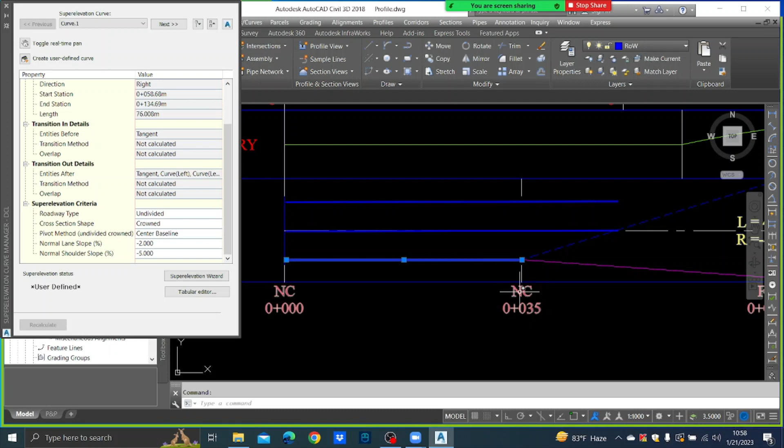Now the thing is, at this point you will have to turn this super elevation. So you should find what is this point. It's easy. First check the scale. Check this one, 35, 71. So it should be 35, fairly okay. Then from here to here, how much? 7.78, say 8. That means your reverse crown is 8 meters away from this 71. So 71 minus 8, 63.

Otherwise you have to calculate. I'm just doing a tactic, right? 63, so that is reverse crown. So here, since we are revolving into the RHS side, LHS should be raised. So it should be plus 2.5.

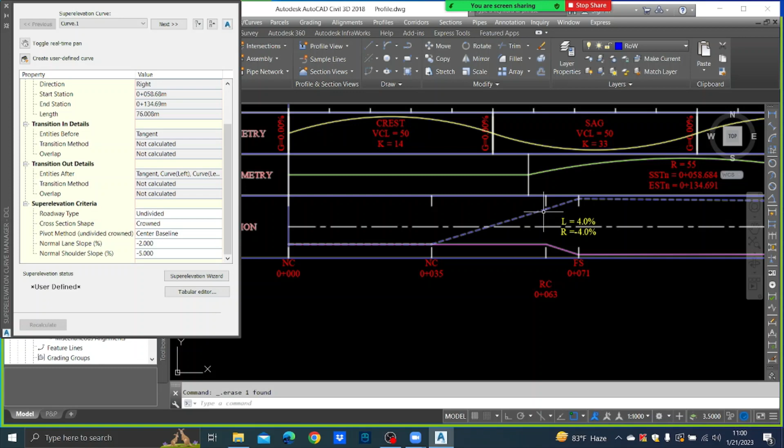And right side it should be minus 2.5. Now can you see? It came perfectly. Of course, please understand, I just played a tactic. You can't calculate it like that. But the theory is, up to 2.5 this has to come like this, then only it is turning.

That's the theory. So what I did was, looking at the diagram, I did it. Otherwise, you have to calculate what this point is using the equations. But anyway, the same thing happens. Here, we'll save this one. And now, if anybody didn't understand, please check what I am doing to the other side of the curve. Same thing I am doing.

How? Now, our end of the curve is 135. So what is our superelevation development length? It is 36, I assume that. Then 12 should be inside the curve. So 135 minus 12, it is 123. So you have to finish your superelevation at 123. So we'll go to edit superelevation. That's the first curve we are still handling. First curve, add station, that is 123.

123. At 123, that critical station is end full superelevation. Usually I check it and come back, otherwise I can't enter anything. So this is the begin full super, the same thing has to come there, and right side should be minus 4, like the earlier one, minus 4, minus 4, and minus 4.

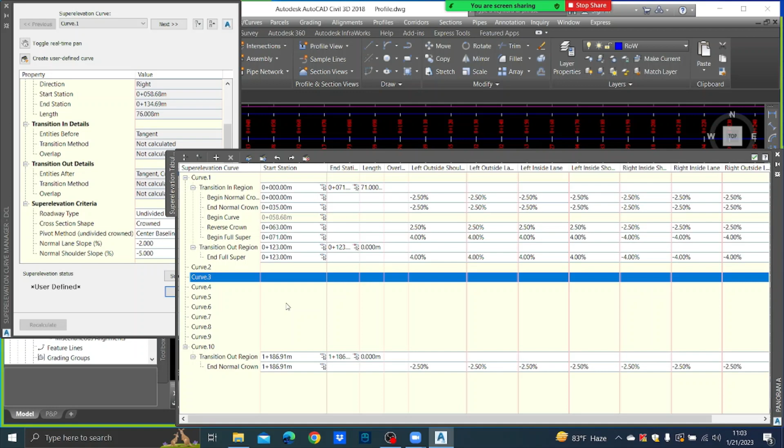So it is 123, then I have to take 36. How much? 159. So the same curve, add station, that is 159. Manual station. So that is begin normal crown. Why? The normal crown is going to start again. If it is normal crown, it should be minus 2.5.

Now this is okay, but the problem is, again you have to give the reverse crown. Now you know how much it should be. 63, 71 means 8 meters. So the same thing comes here. 123 plus 8, that is 131. So we can give 131.

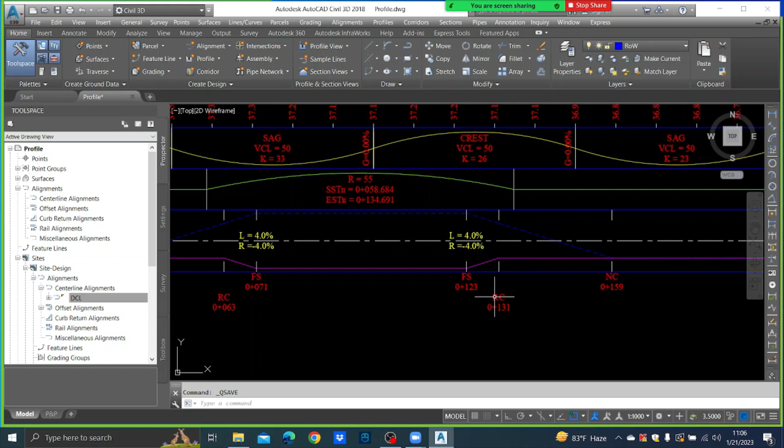And here again is where the lower side superelevation reaches minus 2.5, because you don't draw it like this. Up to minus 2.5 it goes like this, then only it turns. That is the convention. So that's the end of the superelevation. So you have to insert superelevation everywhere like this for all the curves.

You have to calculate, and that is the hardest part of, not Civil 3D, highway design. You have to have superelevation. That is why we have developed an Excel sheet for that. Anyway, we don't have time to discuss that, because I want to cover something about the cross section. So we'll go to that.

Drink some water. Because it's going to be hard, but anyway, we'll cover. We have almost 1 hour. We'll cover that.

So first save it itself. After that, file, save as, we'll put CS, cross section. And to do that we want to have two other alignments. What are they? One is existing tie edge LHS, the other one is existing tie edge RHS. So we'll make them also alignments, create alignment from polyline, same thing.

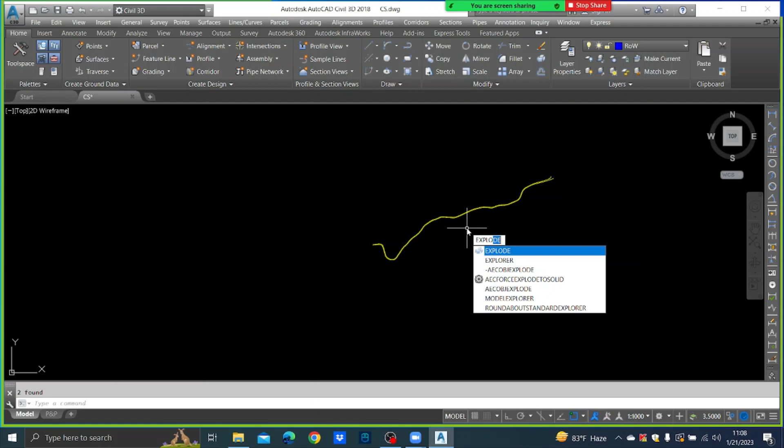You select this one, it's not going to be selected. If they are not going to be selected, you can select them, right click, and go to isolate selected objects. It is not properly made into a polyline, so you can explode, type explode, select them, press enter. Now you can see they are exploded.

So you can bring them into the zero plane by giving the command FLATTEN, select them and press enter. Remove hidden lines, no, enter. Then you can make them polylines by this command. Please note down if you don't know. Maybe you know because it's AutoCAD stuff.

PE, polyline edit. Select polyline or multiple. Press M. Select objects. You select everything. Convert lines, arcs and splines to polylines, yes or no? Yes is selected. Yes.

Use enter option J, enter it, then enter. First is 0, enter. Now you can see they are polylines. Press enter again and then press escape. Now they are two polylines.

If you are not very comfortable with these two line types, you can just match them. MA enter, MA enter. Select the source, select the destination, right? So you can come back by isolate objects, end object isolation, right?

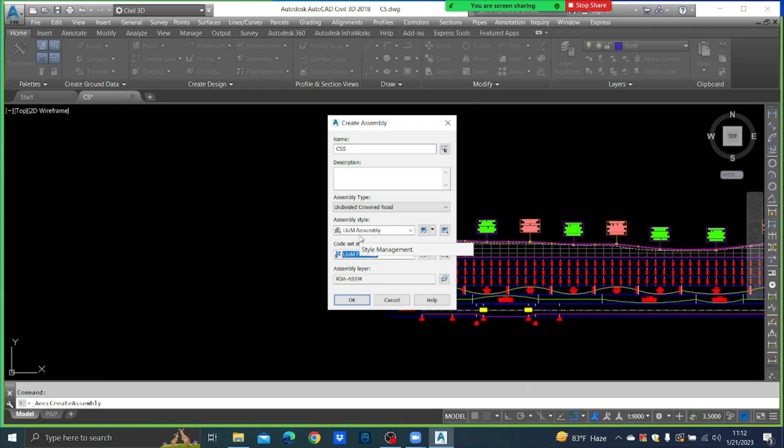Assembly type is undivided crowned road. Why? Because it is undivided, there is no center median, right? Assembly style is assembly. Code set style is finish, that is the one that we have customly made.

So press OK and it says specify assembly baseline location. We give a location somewhere here, and you better draw a circle around it, otherwise because it's very small you can't see, right?

Then we have to model. Now what we are trying to do is we are trying to model our road. Now in our road you can see here there is an existing road, right? After that there is the widening section. This purple color line is existing road, then the widening section, then hard shoulder, then soft shoulder, and after soft shoulder it is cutting or filling. That is what we are going to model, right?

So first we will model the existing road. For that you go to general, tool palettes window, and there is a tab called rehab. You have to take overlay mill and level 2.

Now, if you don't understand, I know, because I am rushing due to the time constraint. If you don't understand, don't worry. Just see how I am doing. Later I will upload this video to the internet, you can check. Also you can refer the book, and then you have to practice yourself because since it's a software, you have to practice it. Otherwise just by looking at the screen, you can't understand anything. Only thing is you just get an idea what I am doing, listening to me, right?

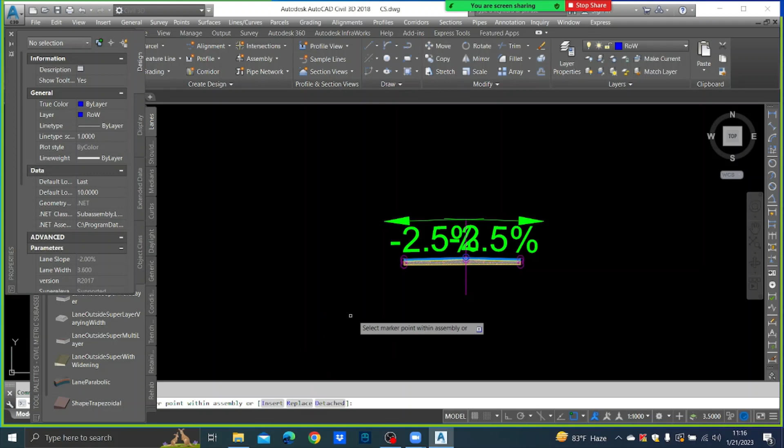Now this is your existing road is formed. Now this is up to 2.5, this is up to minus 2.5, and you have to have another 1 meter for your new road. For that you have to have lanes, and you go to lane outside super multi-layer, and you have to attach it here, right?

And you have to change the parameter. Select this one, go to sub-assembly properties, give the name lane outside super multi-layer R. Why it is RHS? Then go to parameters.

Side is right. Insertion point is edge of travel way. Crown point on inside, no. Width is 1 meter. Default slope is minus 2.5. Super elevation slope is right outside lane.

Lane slope direction is away from crown, that is okay. Pave 1 depth, how much is your width? The depth, what they are asking is the wearing course, 40 millimeters, right? Pave 2 depth, that's binder course. Is there any pave 3 depth, that is the regulating course, anything? No. Base 1 depth, that is 150. Others we don't have.

But since this is the widening section, maybe we'll have to have some sub base. There should be soil because there's no road here now for the time being. So we'll go for say 300 millimeters, 1 foot, 1 foot soil, right?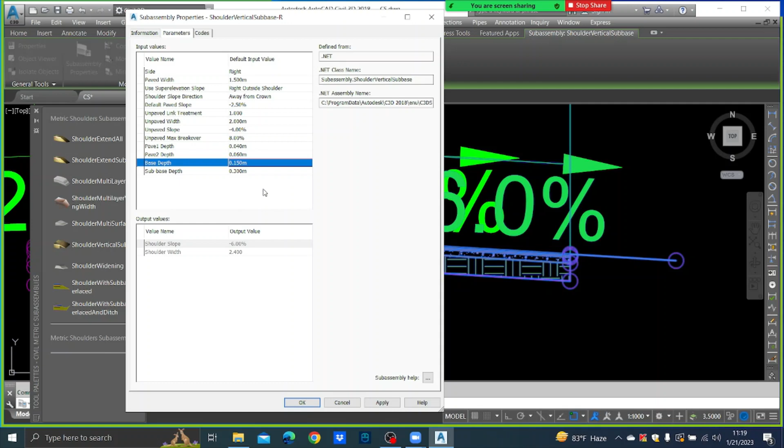Unpaved maximum breakover, you keep it as 8%. Okay, don't change. Then pave 1 depth, that is 0.040. Pave 2 depth, that is the binder course 0.060. Base depth, that is it is 150. Sub base depth is 300. So if you have any question, there is something called sub assembly help. Okay, you can go there and see, right? Autodesk. So how you are going to use them, right? Apply. Okay.

Now you have to have cutting and filling. For this you have to have daylight. There's one thing called daylight. You have to mirror it. Mirror, and you come here, and

You have to right click subassembly properties. You name it as L and go to parameters. Only one thing you have to change. Use super elevation slope, left outside shoulder. Okay, apply and okay. And then you have to have daylight multi intercept, that is the cutting and filling.

So here you have to change only two parameters. You don't want to change even the name. Parameter is cut slope, that is 0.25 to 1, fill slope, that is 1.5 to 1. Okay, so if it is a cutting, it goes like this. If it is a filling, it goes like this. You mirror that also. Mirror.

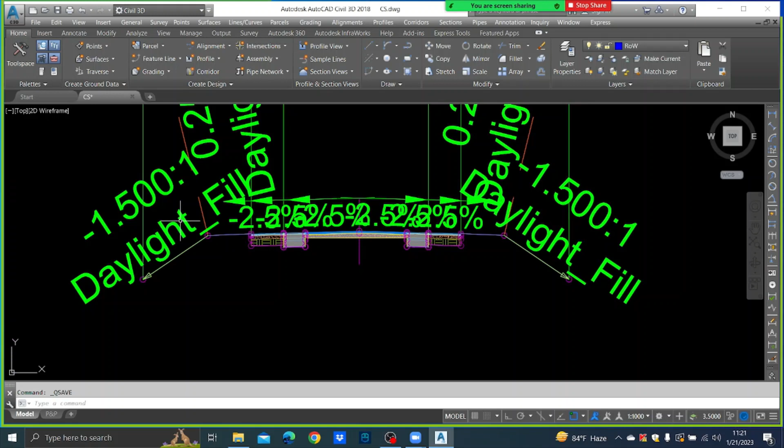Okay, now this is your assembly, that is the modeling of your road. So this section is the existing road, this is the widening section, this is the shoulder, this is the cutting and filling. Now if you want to add drain, you can add, that is there in my book, right? So you can try it if you want. If you want to add a center median, that is also possible.

Now we'll create something called a corridor. That means we try to run this along this center line and along this profile. Understand? That is how you have to have the cross sections. You run this one along this center line and along this profile. We'll try to do this using a corridor.

Corridor, create corridor. So you have to give the name as, say, you can give a name CS. Baseline type is alignment and profile. Alignment is DCL. Profile is FR profile. EG profile means the existing one, right? So FR profile. Assembly is the CSS, that is the one that we created.

Target surface is the existing ground that we created earlier in the morning, right? So here we have to do some changes in the frequencies. Everything should be 10. Curve increment, that is 10.

Along spirals, we don't have spirals. They are asking whether I have to run this corridor in horizontal geometry points, yes or no. But we have not taken levels in the horizontal geometry points, therefore there is no use.

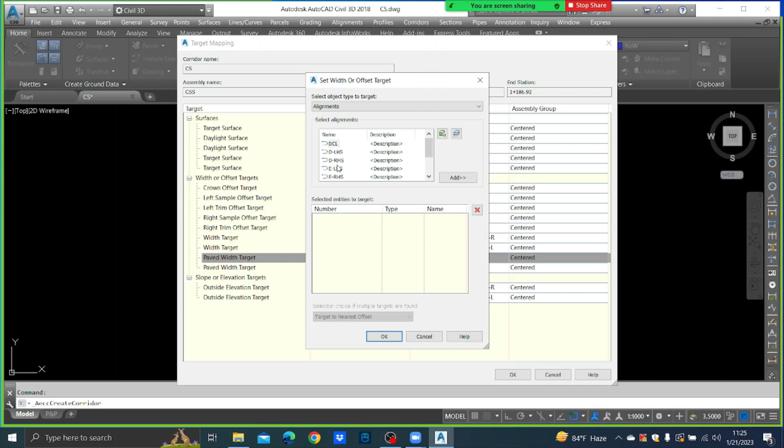Okay, then apply, rebuild the corridor. Now your corridor is being created. Can you see this is your corridor? That means we have run our assembly along the center line according to this profile. So that is what you call a corridor.

Save the drawing. Now you have to create the corridor surface. That means you have run the corridor and you have to create the top surface of that corridor.

That's very easy. You go to tool space and go to corridors. Here this CS is there. You go to properties and go to surfaces. You add a corridor surface and add data here, okay, top. Press apply, rebuild the corridor, and OK.

Now if you go to your surfaces, earlier there was only EG, now here is your finished ground surface according to the corridor. Okay, that's also added.

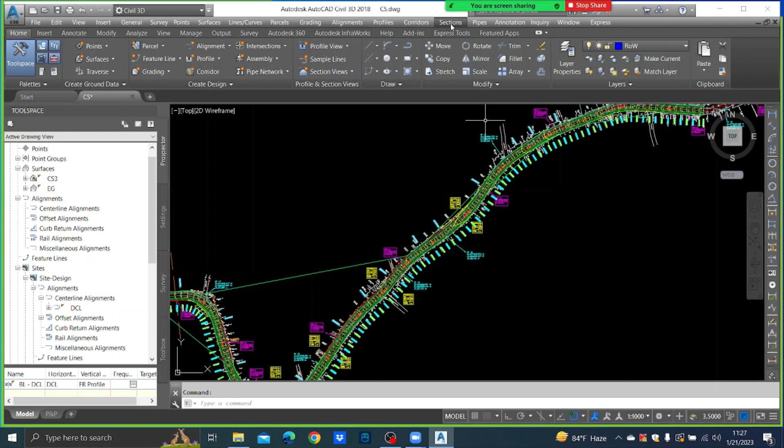So you can use sections, create sample lines, and right click. Here alignment should be DCL. Press OK and you give the name. Usually we give the name SLG1, and sample line style sample line.

Sample line label style is name and section. Here only, you have to change that into finish. Okay, then press OK.

And then go to by range of stations. Station range, whether it starts from the same one, zero, yeah, if you want you can change them, right? If you want you can just put false and then change. If you put it true, it is the same thing.

Snap to, and left swept width means what is the width that you want for the cross section. Usually we give 15 meters, right? Also 15 meters. And the sampling increments, that is where you have to cut it - usually we cut it using 10-meter intervals.

And at range start you have to give, at range end you have to give. Then you press OK and press enter. Now can you see, now it is being cut into 10-meter intervals. Your corridor is cut into 10-meter intervals. Okay, save the drawing. Now it is just a matter of creating the cross sections.

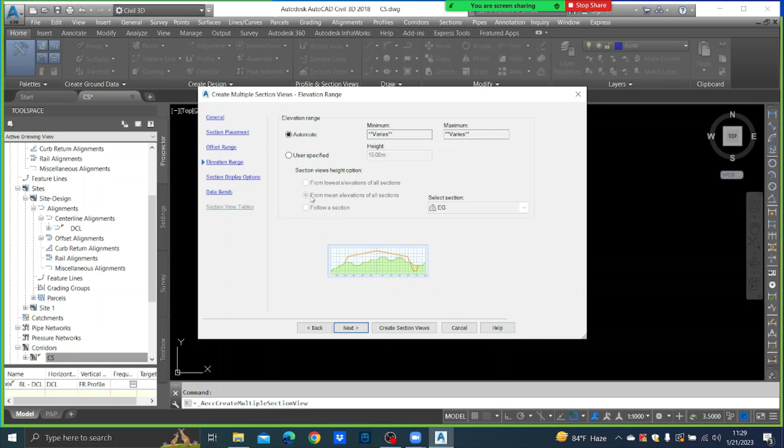Section display options, here you have to untick this final one. Okay, and then go to press data bands. You can use cross sections. FG elevation is the one that we created. EG elevation should be EG offset, so of course we can use the cross section, the new one. Create section views - then if I put my cursor somewhere, the cross sections will be created automatically.

Now you can see from 10, here you have to change this into... the scale, maybe 1 to 50 will be okay, we'll see. Finally you have to change the scale here, right? So, or maybe 1 to 100, I don't know, we'll see what.

1 to 100 is better, it seems. Now can you see, if it is 10, this is your existing road, this is the widening section, and this is the shoulder. Can you see that 5 meter has come like this?

Now this is rising, can you see? 2%, can you see now? Now can you see the fill there? Although you put it 300 here, what about this fill? After that, what happens? Now see the fill? 4%.

Now, please understand that we can't have the perfect cross sections using Civil 3D. Sometimes we'll have to change using AutoCAD tools.

Now, if you want, you can add... because this is the first time that you visualize your road in the Civil 3D environment. Okay, this is how they come.

Once you design it, now you can see here that the fill is not enough. Here, this is ABC, okay, this is ABC. There is no ABC here. So you have to cut the road here.

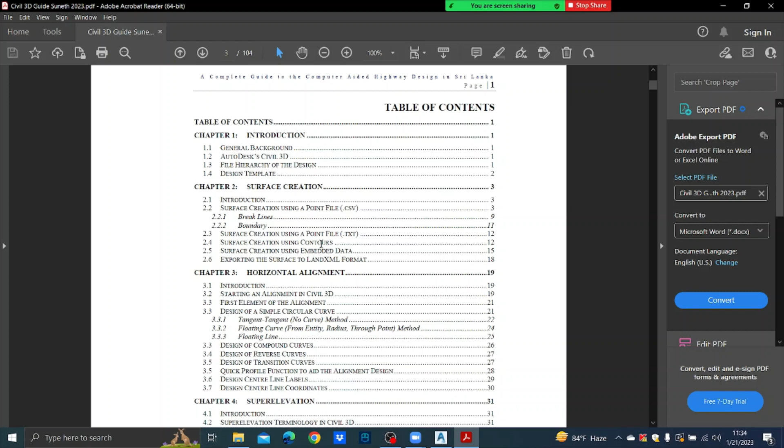And don't refer these things because we haven't covered them. Horizontal alignment, we did starting alignment in Civil 3D, first element, design a simple curve, right, and compound curve and reverse curve. Transition curves we usually don't use for national roads, we use that only for expressways, right?

And quick profile function we covered. Design centerline labels we covered. Design centerline coordinates we didn't cover, so that we can do now.

So that is not a big thing. What you can do is you go to general tool space, and you go to toolbox, and there's reports manager, then alignment. Here incremental stationing report, you can double click it. So it asks what is the profile, the alignment you want. So you have to untick all these things and keep only your design centerline, DCL.

You select it, start station and end station is there, station increment is 10. Now you can click create report. Once you click that, you will get this report here. This is the alignment report, so the station is given, and then northing, easting and tangential direction are given for each and every chainage.

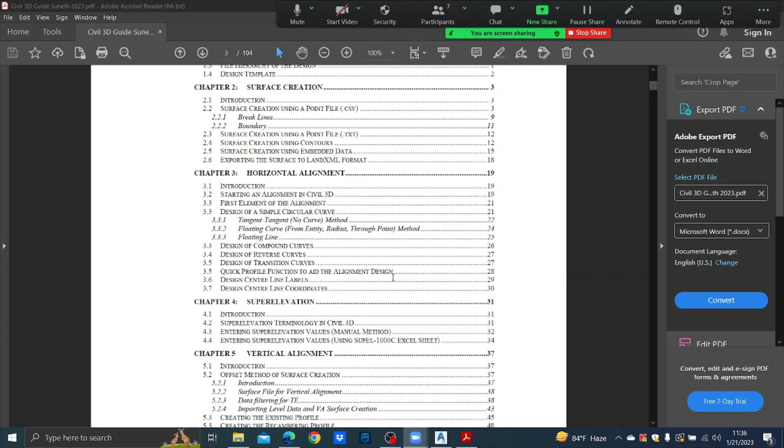Then super elevation. Super elevation terminology, of course, you will have to refer entering super elevation values using the manual method. Now I'll show you how to do super elevation using the SupEl-1000C Excel sheet. That is what we could not cover.

Now, I have a macro enabled Excel sheet like this, SupEl-1000C, that was developed by me. So I'll open it.

So you have to click this enable content. You have to give some details, that is why the RD1, RD2. So the first one you have to give.

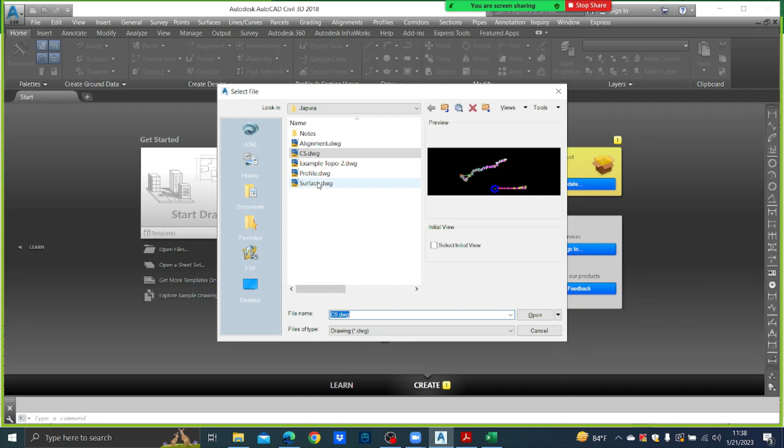So I'll open our alignment, and then this is our DCL, design center line. You right click it, you go to edit alignment geometry, and then alignment grid view. You go and you right click copy all, and

you go to this SupEl-1000C. Okay, and in RD1 sheet you paste everything, right? And then you come back to Civil 3D. This is okay.

And then using general toolspace under toolbox, you go to this alignment curve, right? Under alignment, there's alignment curve. You double click this, and here you have to select only your required alignment. That is only DCL. Don't select any other. Okay, so you have to untick all others. Okay, then press OK.

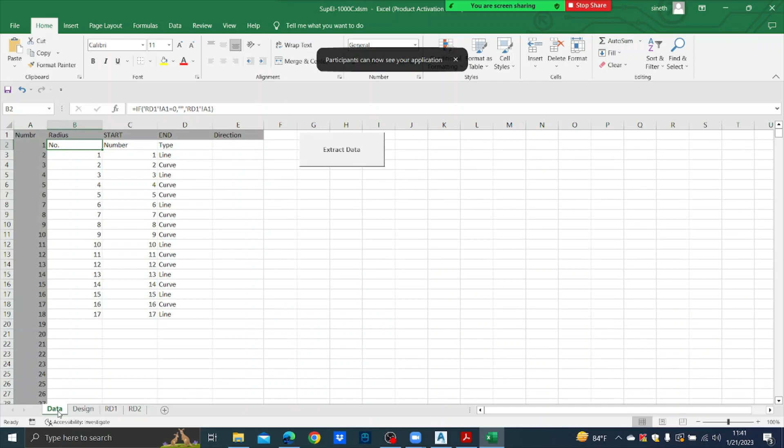come back to that SupEl-1000C and go to RD2 and select everything, paste everything. Okay. After that, you go to data. Now RD1 is the first report that I got. RD2 is the second report I got. You go to data and press extract data, so it will be extracted.

Okay, after that go to design and give the lane width, that includes lane width plus hard shoulder width. So it is 5. Number of lanes per one side is 1. Design speed is 50. There is no uniform LE. Maximum superelevation is 4%. Area type is either open or built up. I'll go for open. Begin alignment station is 0.

Now you can calculate. If you press the calculate button, please check there are only 4 tabs. Another tab will come with the output. Okay. Now this output is the superelevation we want. We have to save it as file, save as. We have to save as type CSV comma delimited.

Okay, CSV comma delimited. So you can give a name like SC, that is superelevation, right? You save it, press OK. Yes. Now close it. That's finished. Now come back to,

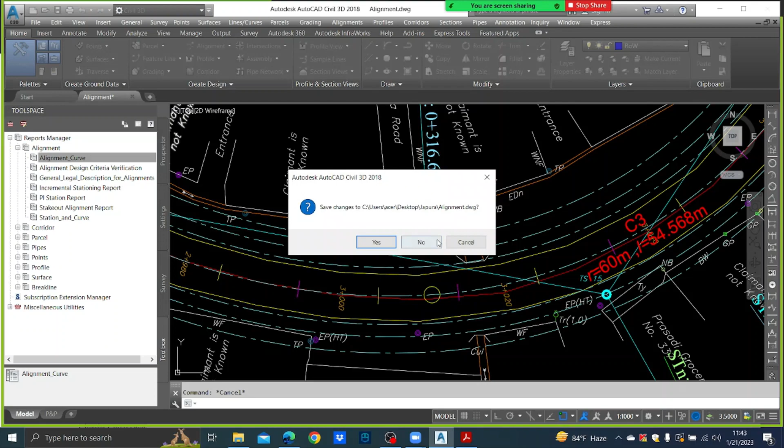yeah, shall we open our profile view, because otherwise I can't show that in alignment. I'll open this profile, right? So the superelevation is what we entered. We'll remove that Prospector. You go to sites, site design, alignments, center line alignment, that is DCL. Go to edit superelevation, tabular editor.

If you press this delete, clear all superelevation data, everything will be gone, right? No superelevation. Now what we are going to do is import the superelevation that we calculated. Here, import superelevation data from file. You have to browse. So you go to SC, press open, press OK, accept all data, remove that, remove this one also, and you can give view region all.

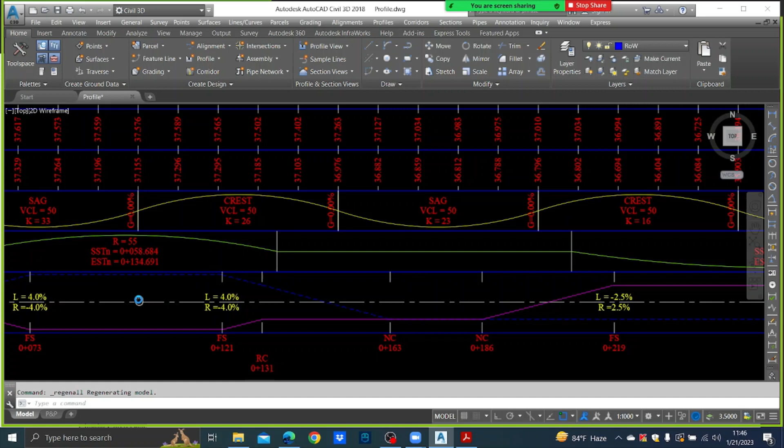right? And then after that, this is the compound curve. So this is the same direction superelevation. Now you can see it is turning this way. RHS side should be raised. So R is 2.5, L is minus 2.5. R is 2.5, L is minus 2.5.

And here you can see this is a reverse curve, and the superelevation has changed direction at the exact common tangent. Here also superelevation has changed at the exact common tangent point, right? So everything is done for you, there's nothing you have to do. Okay, but only in this final curve you have to calculate this side yourself. That's the only problem we have so far in this Excel sheet. Otherwise, everything is perfectly okay.

So it considers here the design speed as 40. Here, I think this is also 40. Oh, everything it considers. So you don't have to worry.